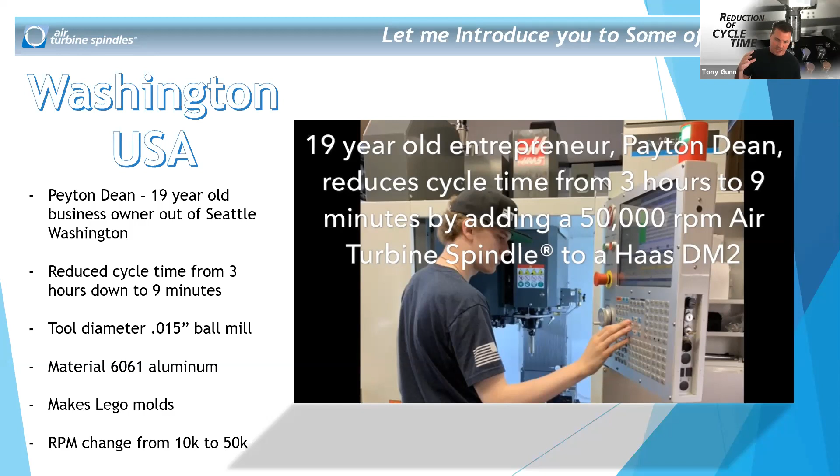But I was out there visiting him, and I noticed he was running a 15-thou diameter ball mill, and that ball mill was going about 3 inches a minute. What we were able to do, simply by changing a 10,000 RPM main spindle up to 50,000 RPM, was reduce that cycle time from 3 hours down to 9 minutes. On top of that, we were able to go from 3 inches a minute to 100 inches a minute just by increasing the RPM. So the reason I want to start with this is to show what success can happen by applying the right techniques to an existing operation. There wasn't anything crazy done. It was simply adding RPM to the existing program.

These guys here are my friends in India, based out of Pune. Their company is called Tork Motors, and they make a really cool electric motorcycle that goes for about 3,000 US dollars. We were able to reduce the cycle time on all of their components by 50% or more, from electrodes in copper to slotting in aluminum to engraving in steel. We reduced each one by 50, 60, 75% or more in cycle time. Again, all we did was change from 5,000, 8,000, 10,000 RPM up to 50,000 and 65,000 RPM.

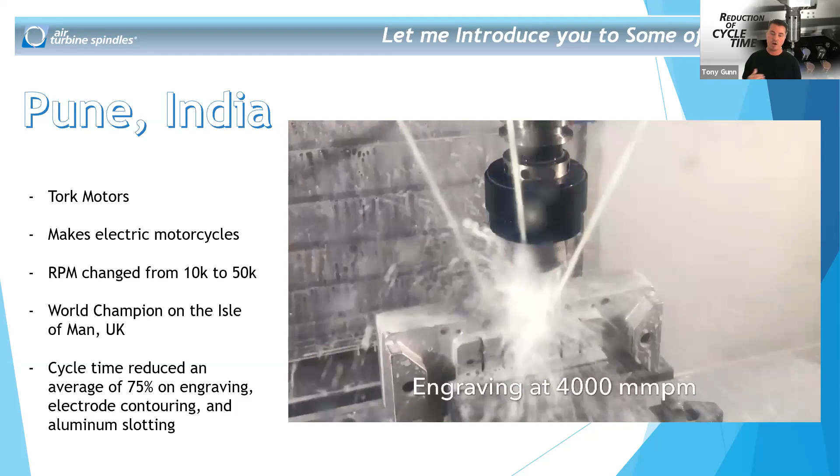So what is high-speed machining really?

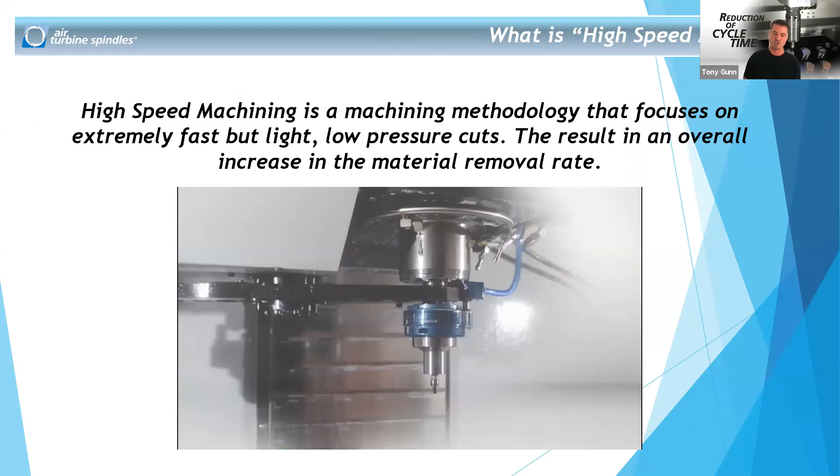This often gets complicated because people say, well, it's when I can move my machine really fast, which is true. And other people say it's when I can spin my tool at 100,000 RPM, which is also kind of true. But what we're trying to create is a perfect relationship between that feed rate, depth of cut, RPM, and rigidity of the work holding.

So what we're doing is taking light cuts and flying through it as quick as you can. Now a lot of people have a mindset that says, okay, right now with my 1/8 inch tool, I'm going an 1/8 inch deep. And if I change my RPM from 10,000 up to 50,000, I can keep my same depth of cut at 1/8 inch deep, but go 5 times faster in my feed rate based on going 5 times faster in RPM. And that's not actually how high-speed machining and micro machining work, based on tool rigidity as well.

That's why we want to define what high-speed machining is and the ability to do light, very fast passes to create that same material removal rate that we want to get.

So what are some of the challenges? Obviously this kid doesn't have much of a challenge doing that. I wish I could do that. But so what are some of the challenges?

I think a lot of these challenges are obvious in the sense that they're easy to find out. It's really easy to figure out when I'm making a mistake, because either I'm losing tool life that I shouldn't be losing, or my finish isn't what I want it to be, or I'm breaking my tools, or my cycle time just isn't as reduced as I thought it would be. So what are some of the challenges?

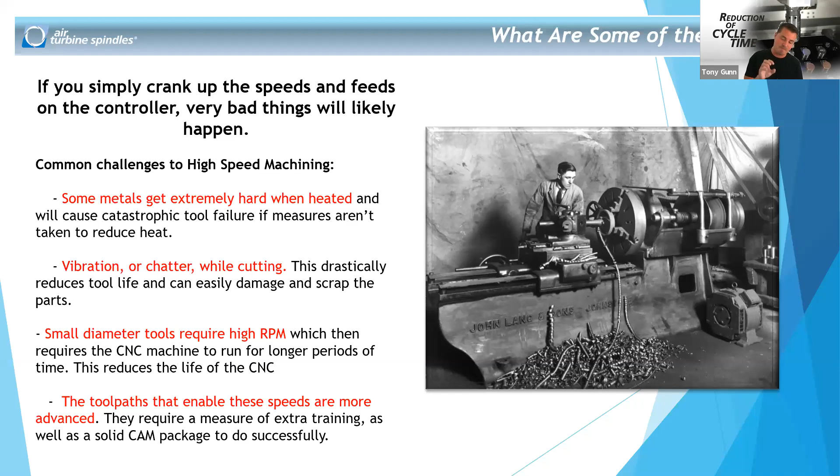Micro end mills live in a different world than most cutters are used to. My friend Don is going to go over a lot of this with Harvey Tool — he knows far more than I do. I think a lot of what happens is I know how to break them, and he knows how to tell me how not to break them.

But the feeds and speed formulas and calculations that work for larger cutters typically don't work the same way when you get into micro machining. Harvey Tool, to my knowledge, has a nice mathematical calculation that Don is going to share with you to get a good starting point for calculating depth of cut, feed rate, and the amount of rigidity a tool can have. But we suggest that the cutting physics start to set in with tool diameters at 1/8 inch and below.

And with small cutters, the cutting force is twice what conventional calculations suggest, which compounds the problem of rigidity and tool deflection based on how thin it is. So if it's gaining more force than a larger tool, and it creates more deflection and it's less rigid, that obviously makes these tools more delicate, in which case we must have higher RPM.

So rigidity, vibration, this is the #1 issue in high-speed machining, the #1 enemy. And it's not just how rigid my product is at AirTurbine or how rigid the product at Fifth Axis is with holding the material. It is from the machine spindle all the way down to the rigidity of the machine table. Any one of these pieces, from the machine spindle to the tool holder to the extensions to the workpiece to the machine table, if any one of those aren't as rigid as they should be, that'll be the weakest point, which would be the start of bringing down the ultimate success that you want to have while high-speed machining.

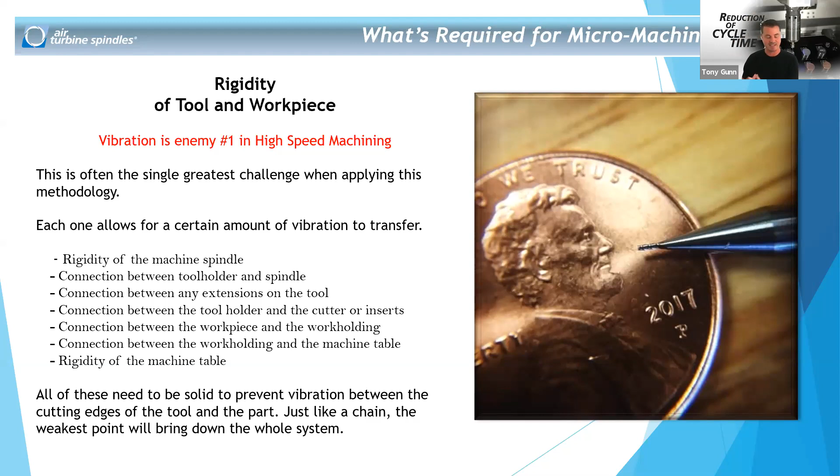And the smaller you get in tool diameter, the more rigid things need to become, the more important that runout is. But what happens when you don't have good runout? What happens when a tool is not perfect, or a spindle isn't spinning as symmetrical as you'd like? It causes one flute to cut deeper than another flute, which is going to create a weird chip load. It's maybe going to wear down your tool quicker than you want. Delicate cutters are also very stingy about how much chip load they can tolerate. So if one side of my end mill is cutting heavier than the other side, it is likely that I'm going to break that tool because I'm taking too heavy of a load on one side.

To keep runout from becoming a limiting factor, it needs to be kept no more than 10% of the chip load. In my opinion, that's a number that's thrown out there. It's a great number as a general rule, but we just need to be darn near perfect. When it comes to an air spindle spinning at, say, 50,000, 60,000, 90,000, 100,000 RPM, if you're not spinning almost or completely perfect, there will be an issue, which is why the air spindles, which we'll talk about later, are less than 2 micron in runout at 50,000 RPM.

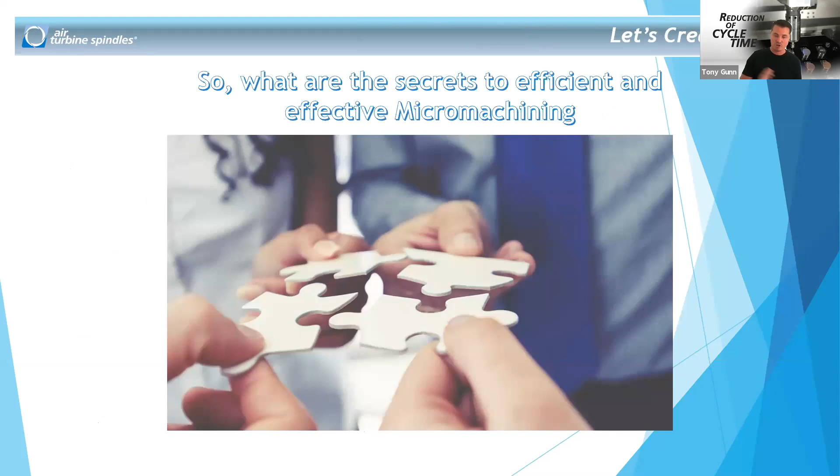So what are some secrets to efficient and effective micromachining? Now that we've figured out what some of the problems are, let's figure out how to solve them. My buddy Titan here, I'm not going to play this video because I don't think everyone can hear the volume on this Zoom platform. But the significance and importance of high RPM and SFM, so surface feet. What are we trying to generate by spinning faster? My buddy Titan is explaining that significance.

And I want you guys all to envision, and when I was doing this part live, I could see people shaking their heads. And right now I'm sitting in my living room kind of talking to myself. So I'm hoping everyone is going to understand what I'm saying.

But imagine back in the day, before all these rules were put in place, those merry-go-rounds that your parents or friends pushed you on, and there was no safety. The faster you were pushed, the greater that velocity became. If you're on the outside edge of that merry-go-round, it is tough to hang on. And that's kind of the fun, right? You're laughing, you might get flung off. The velocity on the outside is way more powerful than the velocity at the center. So if you're trying to hold on to the center of the merry-go-round, it's actually quite easy.

You can feel yourself being pulled to the outside of that merry-go-round where the velocity is more powerful. So what we're saying is, as you go to the inside of that force that's spinning, it must spin faster in order to generate the same velocity that's generated on the outside. So if I have a 5-inch face mill spinning at 10,000 RPM, and a 20 thou diameter ball mill spinning at 10,000 RPM, it's the same RPM, but your cutting velocity is going to be so much less for one versus the other, which is why that 20 thou diameter end mill needs to go 60 or 70,000 RPM versus that 5-inch face mill going at 10,000 RPM. And that's the significance.

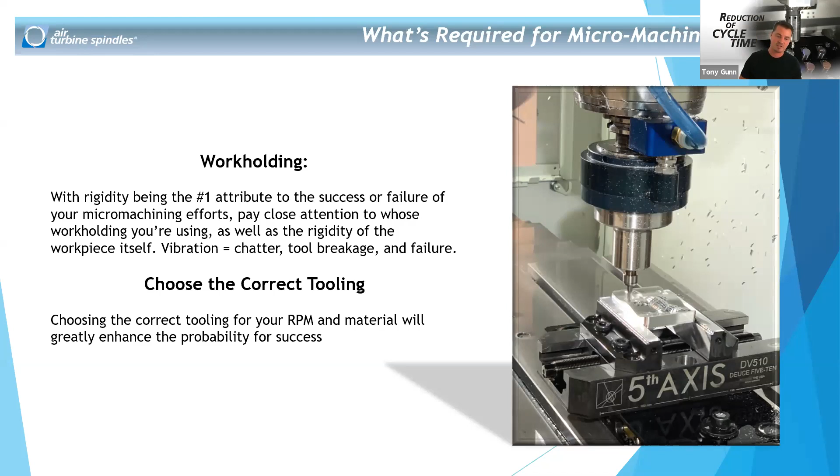Workholding, rigidity. We talked about this. I'm going to let Matt Evans, a lot of us call him Mevins, over at Fifth Axis, talk about this more with you. But workholding and that rigidity is super important. Choose the correct tooling, again, super important. That's what Harvey's here for. And high spindle RPM. We've talked a lot about this as well. So these are significant steps that need to be applied in order to generate micro machining success.

So what are the advantages of high speed?

And I've not seen this movie yet, but I heard both good and bad. So I think with everyone on quarantine, I'll give this a go before too long.

All right, so advantages of high-speed cutting.

Hopefully I'm not boring anyone yet. Hopefully my redundant voice is entertaining enough in my terrible jokes.

But now we get into the advantages of high-speed cutting.

Increased machining accuracy. And this is kind of a cool thing that I had researched a couple of years ago, and it's kind of neat. And I'm sure you guys are reading it as I talk. But what's neat is as the cutting speed increases, the cutting force decreases due to thixotropy, or the property of a material to be work softened due to the shear strain imparted on it by the tool's cutting edge, and then go back to its original hardness once the cutting process is complete.

That's pretty cool. Now, I'm not a metallurgist, but I do appreciate when a metallurgist does his job and applies that information to me, and then I can utilize it while spinning at a higher RPM to create success on my end.

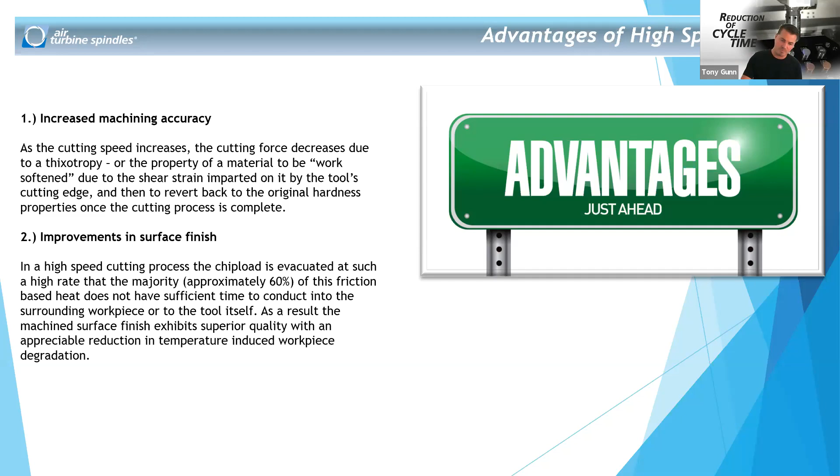Improvements in surface finish, I think that's pretty obvious based on what we were saying with velocity and the higher RPM that's required. When you get into that small diameter tooling, you want to get that mirror finish. You don't want to do any of those secondary operations. That high RPM is going to help immensely. Reduced burr formation, I believe that's also obvious based on a better finish. Longer tool life, which we've discussed a lot, and I believe Don's going to help us out with that.

Excuse me 1 second while I take a sip of tea.

And reduced cycle times. Reduced cycle times, I think, is obvious: if I'm going at 10,000 RPM and 5 inches a minute, and I go at 50,000 RPM and 100 inches a minute, that's obviously going to reduce my cycle time. So yes, RPM can help with that in conjunction with everyone else's technology. So how can the air spindles help you find success?

Work smarter, not harder. In an ever-evolving world, which is something we're all dealing with, adapting to, trying to adapt to at this very moment, with most of us working from home, some of the most intelligent things we can do have to do with being more clever in the way we think. Not just thinking outside the box, but realizing there is no box at all, and we have to recreate ideas of how we once thought. So thinking smarter and not harder includes everything, not just air spindles. It includes how we're going to all work together in this new modern world that we're living in.

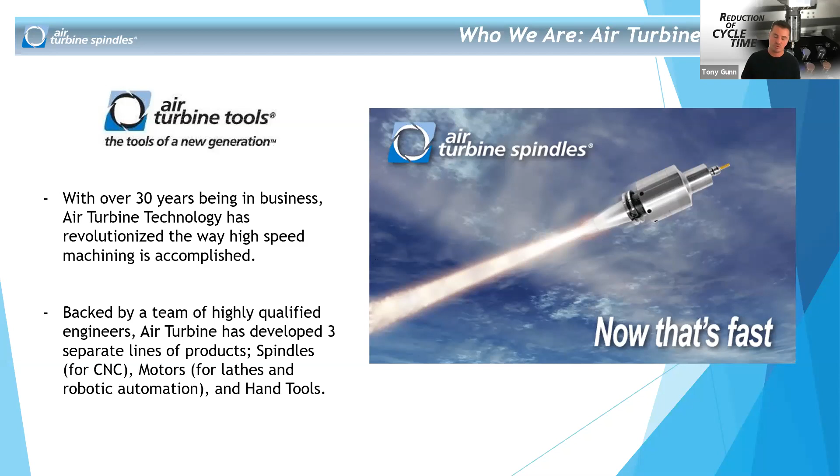AirTurbine's backed by a team of highly qualified engineers, and they've created 3 separate lines: one for your CNC mills, one for your turning machines, robotics, automation, and then your hand tools, which is how the company started over 30 years ago. So what benefits are received from this technology? Well, it says compatibility to machine with both speed and power without sacrificing one for the other. And what that means is what I just told you about the CNC machine being instantly turned into a high-speed machining center.

If I have all the horsepower and torque that I need in that main machine spindle, but I'm maxed out at 12,000 RPM, and I have a small diameter tool or 2 small diameter tools, and I have to max out my machine RPM at 12,000 for 30 minutes, an hour, 3 hours, 4 hours, that's not a healthy relationship for your machine. So by applying an air spindle or a higher RPM situation of any kind to your CNC machine, you now don't have to sacrifice speed and power.

You can have the speed when it's required by rotating the air spindle in through your carousel, which we'll go over later, in through your ATC into your main spindle. So use all your horsepower and torque as you normally would on your CNC machine, but then rotate in the higher RPM whenever it's required.

This way you don't have to dedicate a whole machine just to higher RPM, and you have to have a secondary operation doing this. This way you don't have to machine for hours and hours, redlining the RPM of your CNC machine. It's a combination of both. It's cost effective. We can go over prices later on if you want to, but again, this is not for me to try and sell products today. I just want to try and educate.

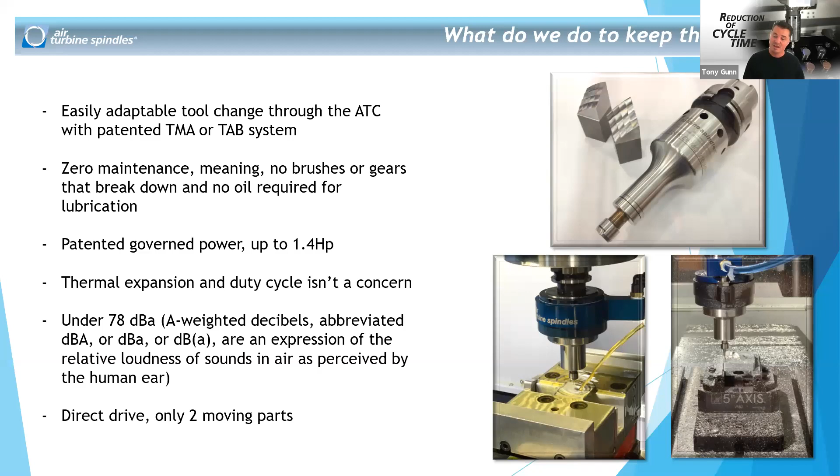Thermal expansion, we've talked about that, and it's super quiet. It is under 78 dBA. A lot of times in these machine shops, you can't even tell they're running. It's not the first time for me to plug it into a machine and somebody looks at me and goes, 'Did you turn it on yet?' And they actually want to touch the spinning cutting tool at 50,000 RPM to make sure it's spinning, which is a liability. Don't do that. But they're incredibly quiet, and that's going to be a benefit as well.

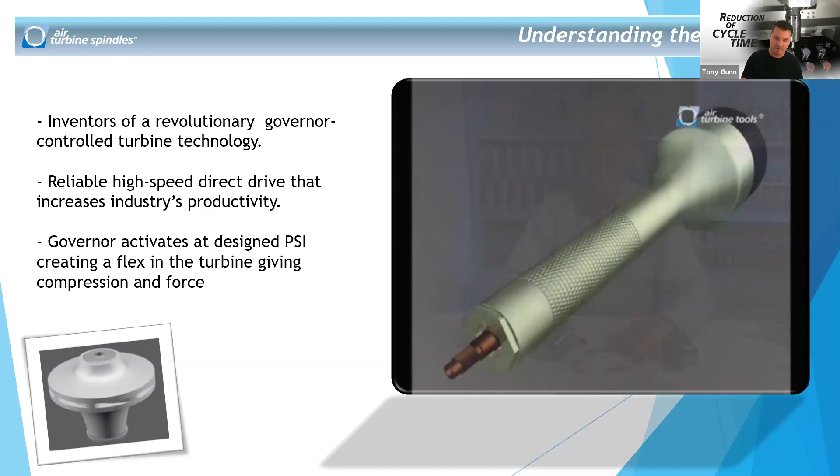This was a Kennametal ceramic tool cutting Inconel, and this is the max capacity of the shank diameter that an air spindle can hold. At 160 thousandths deep, 40,000 RPM, and a feed rate of 190 inches per minute, we were able to quadruple the tool life of that ceramic tool cutting Inconel. Inconel, with its high nickel content, is incredibly hard, so most high-speed alternatives don't have the capability to really put a dent into these harder materials. This just shows you that the AirTurbine product can.

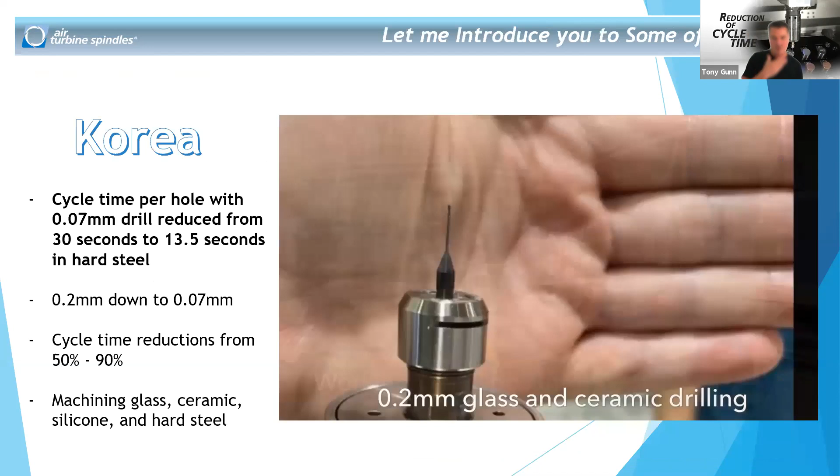So friends in Korea, again, these guys are precise. I love them. So when you get all of these attributes together, your rigidity, your tooling, your programming, your RPM, what can be accomplished?

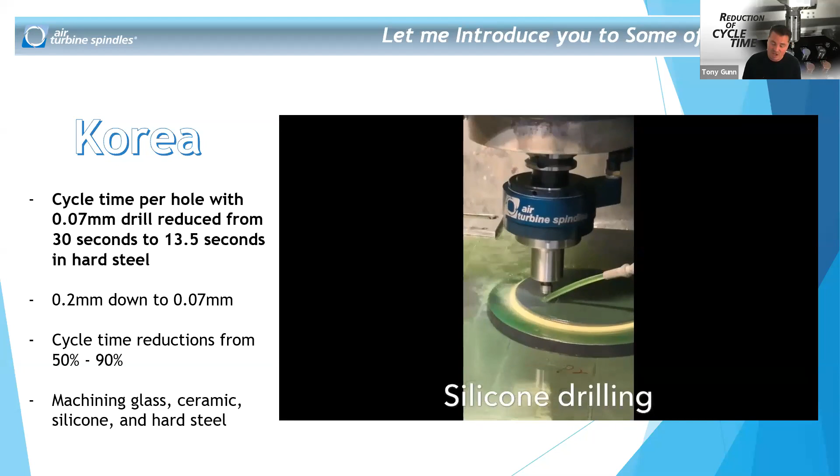So here in Korea, we were machining hard steel with a 0.07 millimeter tool diameter, which I believe translates to about 2/1000. We were able to reduce the cycle time per hole from 30 seconds to 13.5 seconds per hole. This customer had thousands of holes, and I was told that the overall cycle time for one of his jobs was 32 days, which with this new hole-per-second cycle time, took his 32-day cycle time down to about 15 days just by adding RPM, making sure the tool was as rigid as could be, and the run out was good.

But this is some of the success that can be created with higher RPM. 2/1000 in diameter is not going to be possible without really tiptoeing through a program.

So we talked a little bit about thermal expansion, right? With longer programs, whether it be a machine spindle or anything with gears, the components on the inside will heat up and expand, and too much heat will actually break them down, which is why in a lot of situations you have to have breaks from your CNC running at higher RPM because it needs to cool off. It's going to break down and expose the weaknesses of the machine itself.

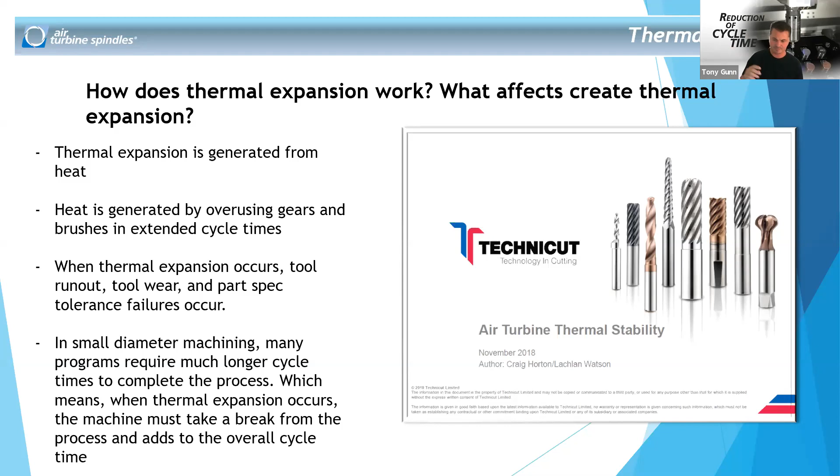So with AirTurbine, being that it's so significantly simple on the inside, you don't have to worry about that thermal expansion. A test was done by our friends in the UK called Technicut, an amazing company that makes their own tools for the aerospace world. Technicut decided that they wanted to run a test with our products and with AirTurbine's products.

What they found was that after an initial heat up, it remained the same temperature for over 12 hours. What else was found, you guys can read this, says the maximum change of thermal expansion was 9 micron, which was taken after 10 hours. However, the small increase towards the end is due to the buildup of cutting edge, which was observed at the end of the test. I was on the phone with these guys, a great group of people, and the titanium they were cutting actually started to stick to the end mill itself. Due to that, 8 micron came from the overall 9, and only 1 true micron of thermal expansion after 10 to 12 hours of straight running.

So tool mounting, tool changer mounting assembly, that's what we call a TMA. A lot of people call it a stop block. As you can see here, it's about to tool change out.

One of the most popular questions we get is, do I have to manually load it and unload it? Can I put it through my ATC unit like everything else? You absolutely can. It's part of keeping it simple, and part of making sure we're not adding any cycle time to your already reduced cycle times that you're trying to have. So absolutely, this goes through the ATC of any of your CNCs, and that way you can use your main spindle as it should be used, for power, torque, and horsepower. And then when you need the higher RPM, you just rotate it in quite simply.

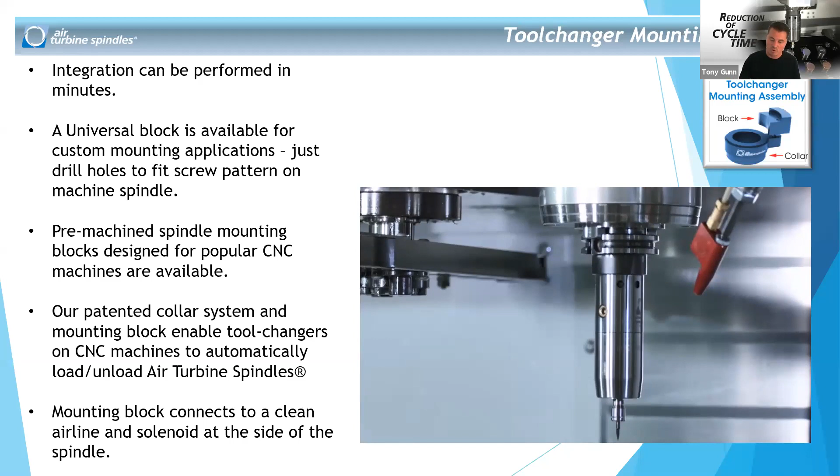But there are a few different ways to power the air spindles. You can power them by utilizing through-spindle air, which is air through the back end of the tool, super simple. You can use a manual connect and disconnect through the side, which is a little bit slower and goes back to having to manually load and unload, or our patented TMA block, which we just discussed, which allows you to then go through the TMA like any other tool.

So as far as technology, what is AirTurbine continuing to do to make your life easier? Well, new product is a 90-degree spindle. A lot of people get excited about this. It's what's great about a Haas machine, and many of the other machines, of course, but as you can see, this is tested on a Haas machine. If I do an M19P and then pick a number, I can rotate that 90-degree tool anywhere in the 360-degree area. And then it goes right back into the tool changer.

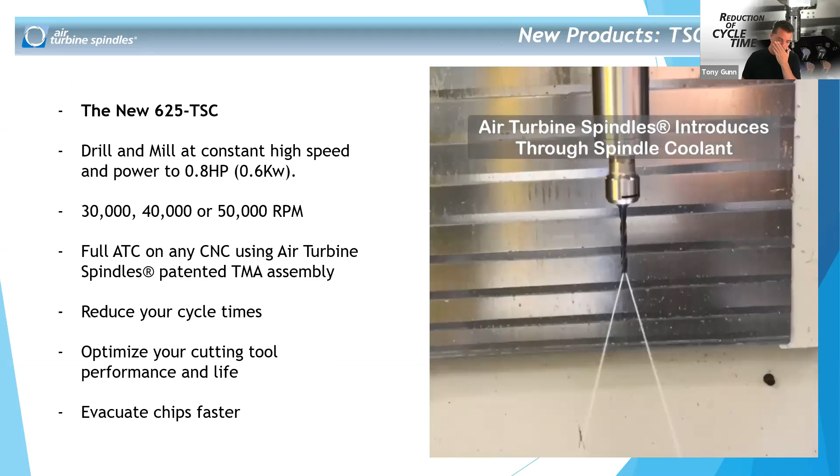Recently released is through spindle coolant. So if you're doing a lot of drilling, if you're having trouble evacuating chips, the same powerful air that goes through the side of this tool is still constantly applied, but now we have a hollow shaft that allows the coolant to go through the back end. This allows you to drill a lot faster, have the longer tool life you're looking for, remove chips, and reduce cycle times. That's the benefit of a through spindle coolant tool.

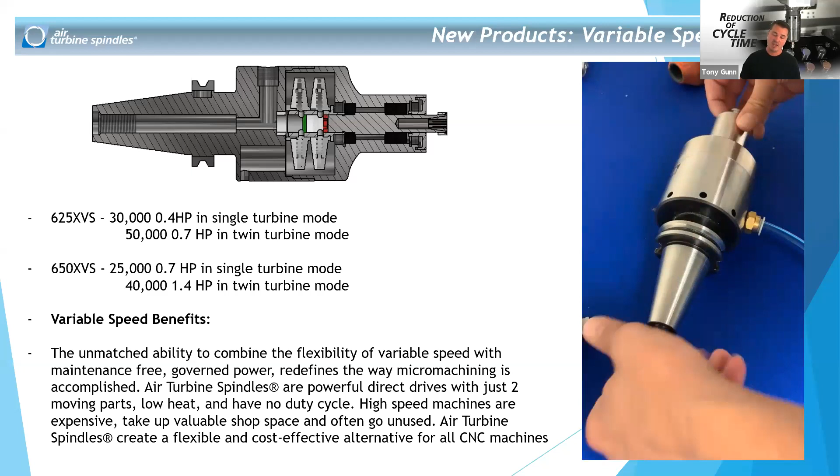Something else that's exciting for us is variable speed. For over 30 years, AirTurbine has been known for one powerful fixed speed that doesn't reduce while under load. However, recently released at EMO this past year, 2019, is a variable speed tool. There's a lock nut that slides all the way forward and all the way backward. When it slides forward, you're using one turbine spinning at either 30,000 or 25,000 RPM, depending on the tool. As you back that nut out, you activate a second turbine, allowing a second speed of 50,000 or 40,000 RPM, depending on the tool. Now you have the option of a variable speed tool.

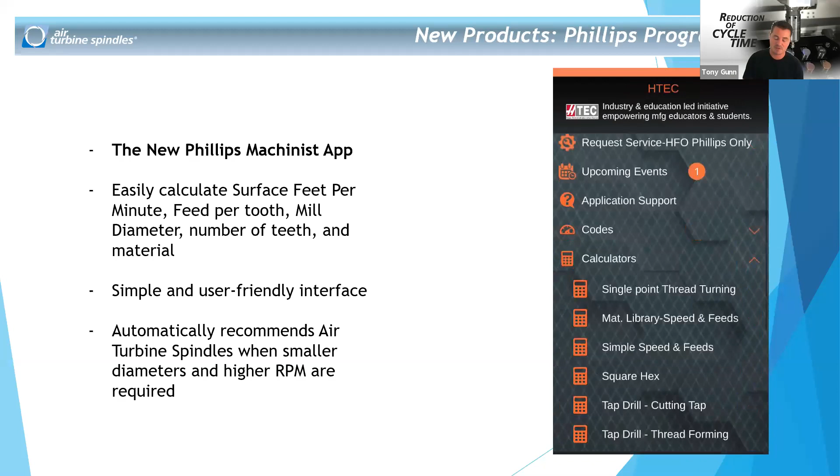Working with the Phillips team over at Haas, also a great group of guys, they developed the Phillips Machinist app. If you don't have an app to help with your programming calculations, we highly recommend this one. It's a great one. What's beneficial to AirTurbine is if you're putting in numbers that require a higher RPM or a faster machining speed, it will automatically take you to the AirTurbine website, where you can pick what's required for your tool, your end mill diameter, and your material. You'll be directed to the exact area you need. The Phillips Machinist app has been a huge benefit to a lot of customers. If you haven't downloaded it, I'd recommend it for many reasons.

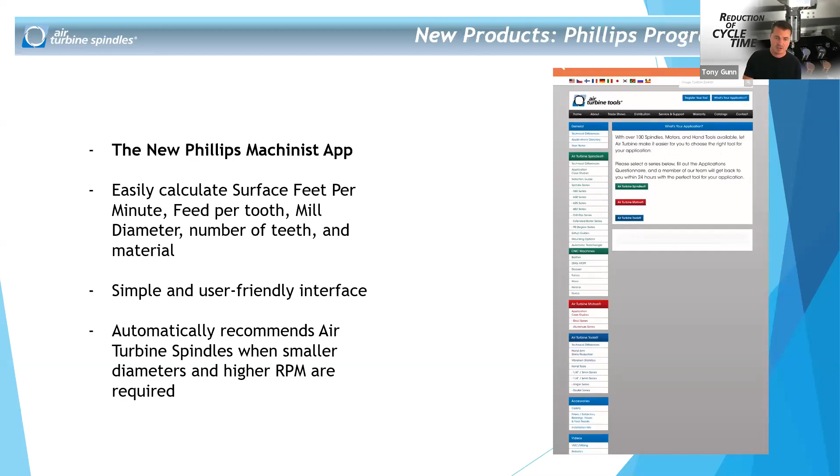I'm going to quickly go over this, because I have no idea what time it is, and I know I talked a lot. We're a little bit over, Tony, just a heads up. Awesome, you're all right, Rob. I'll speak like I'm selling cars or something. This is significant because most people don't realize how quickly you can make money, and I'm going to talk quickly—if I repeat myself, that just means I'm talking slower. Let me go ahead and skip ahead.

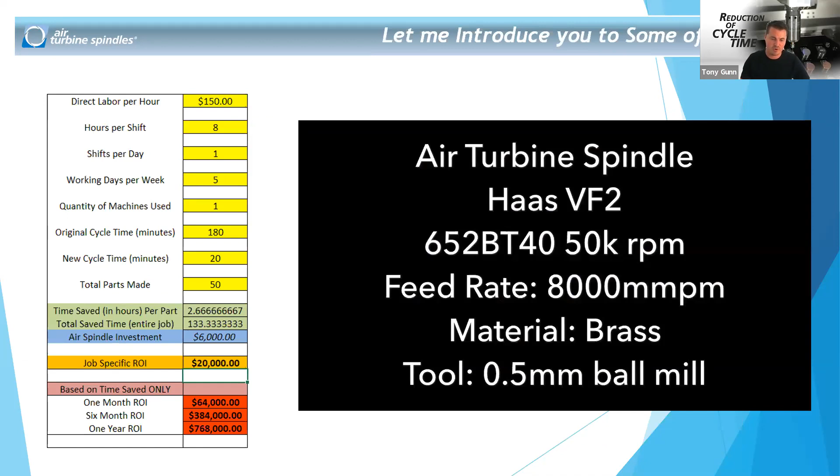Although I'm showing another $20,000 in savings here on a soap mold, I don't want to be too redundant. Thanks to Rob, I now know what time it is, so we're going to skip through this one, but you can see the cycle time was saved again.

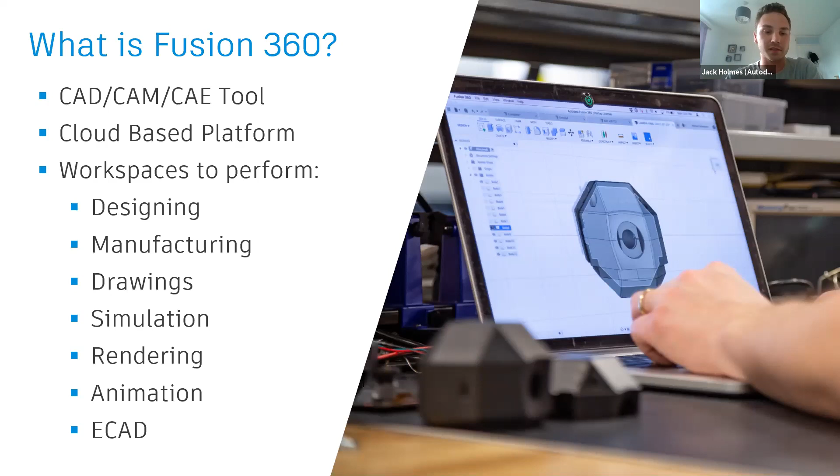So we've got workspaces for doing design work, for doing manufacturing, for doing 2D drawings, simulations, rendering, animations, and the latest addition, which was put in a couple months ago, was an ECAD workspace as well. So that's an area for doing electronics work, so for designing and creating PCBs and all that kind of stuff. So we'll have a closer look at some of those workspaces now.

So the first one we're going to have a look at is solid modeling. So within the design area, we can create 2D sketches and then use tools such as extrude and revolve to take those 2D sketches and turn them into 3D solid models. And then on those 3D models, we can apply various features such as fillets and chamfers. We can put draft angled faces on there. We can add extra material, remove material, etc. All of the standard CAD tools that we'd expect, really.

When we set these up, we obviously dimension the various features and items, and we can link these dimensions together as well. So that means, for example, if we make the diameter of circle 1 relative to the diameter of circle 2, when we change the size of that first circle, the second one will automatically update. And if we're clever about it, we can set up the whole model so that everything's linked together. So just by changing one dimension, everything will scale and adjust accordingly.

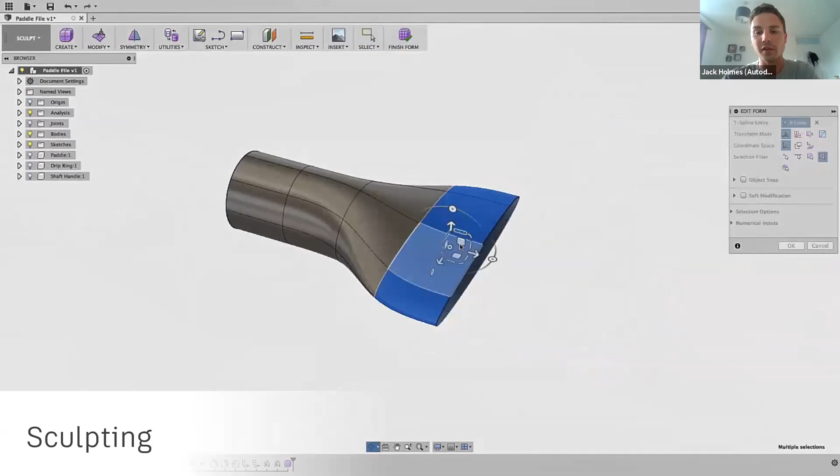As well as solid modeling, we can also do what's called sculpting in the design space as well. So rather than being based off dimensioned 2D sketches, it's a much more free-form style of designing and working.

So you'll see here it's based off manipulating surfaces, manipulating the vertices and the nodes of these surfaces by dragging them around, rotating them, scaling them in a much more organic freeform way, I guess. You can imagine it similar to sculpting clay or something like that. It's much more visual based than entering specific dimensions or anything.

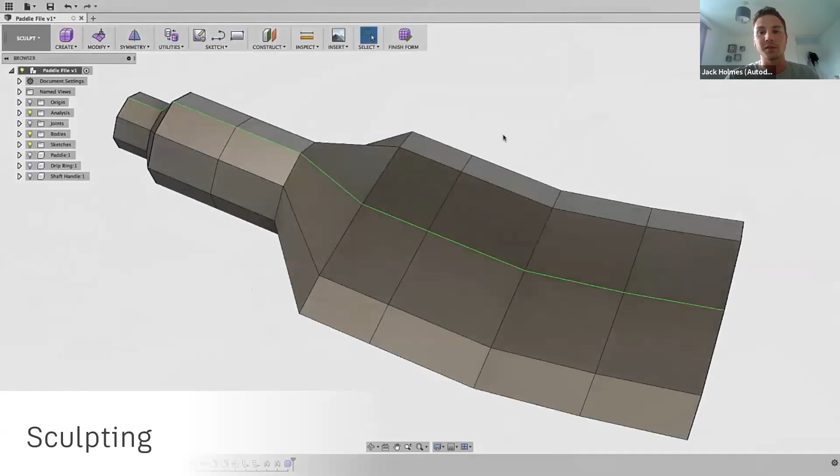The models that we get out of here, once you're done with your sculpting work, can be used in exactly the same way as the solid models, so we can still apply fillets, chamfers, etc. And we can switch between the two just by changing literally the tab that you're in on the design workspace.

So on top of these two, we've also got sheet metal design. So this is, as the name suggests, a way of designing our sheet metal parts. So we can create our 2D layout for these. We can put in where the folds and bends are. We can put in the cutouts, and then fold those into the finished form.

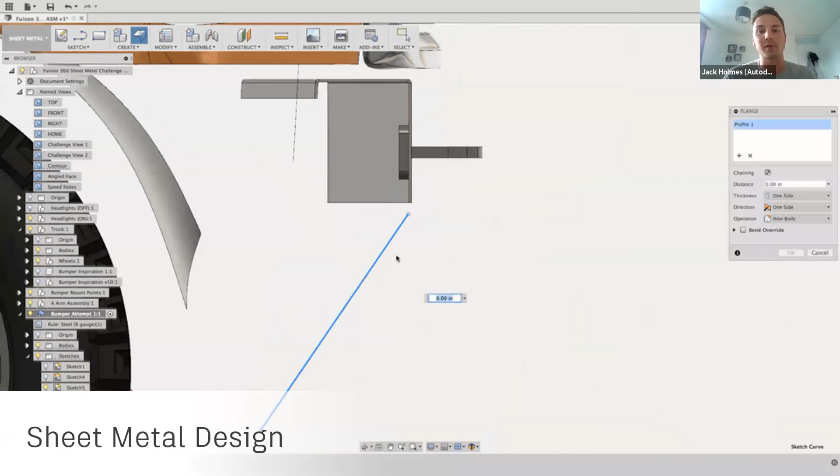And we can do this all as part of the rest of the model and the assembly as well. So we can do it in place, around our solid models, around our sculpted models, to make sure that everything fits together as it should. And that's one of the big benefits of having this integrated system, is that we can swap back and forth between these different environments to make sure everything is linked and lined up as it needs to be.

So as well as our design space, we've also got the manufacturing workspace, and I'm guessing that's what most people on this call are most interested in. So we can take our models, whether they're our solid models, our sculpted models, our sheet metal, and bring those over to the manufacturing workspace. And again, we do that pretty much with just the flick of a switch. We just choose our workspace from the drop-down list, and it will bring us into this manufacturing workspace instead.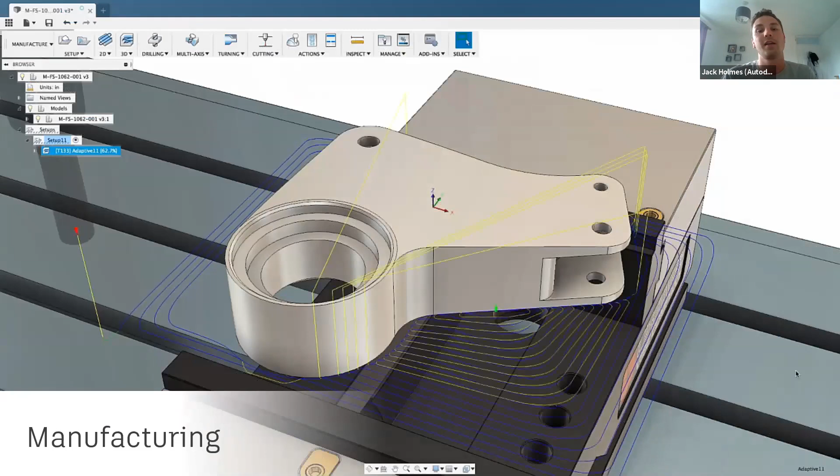And in here, we can carry out milling operations, turning. We can do cutting, so that's things like laser cutting, water jet, plasma cutting to do our sheet metal parts, for example. And we can also do additive work as well, so 3D printing. For the milling work, we can do everything up to full 5-axis simultaneous. And for the turning, we can do a combination of the milling strategies as well, to do turn-mill rather than just your standard operation.

Within here, you've basically got a number of different strategies depending on the operation type we're going for, whether it is milling, turning, etc. And then as we can see, you apply your toolpaths to your model. You can simulate these toolpaths and then run this on your machine in the real world.

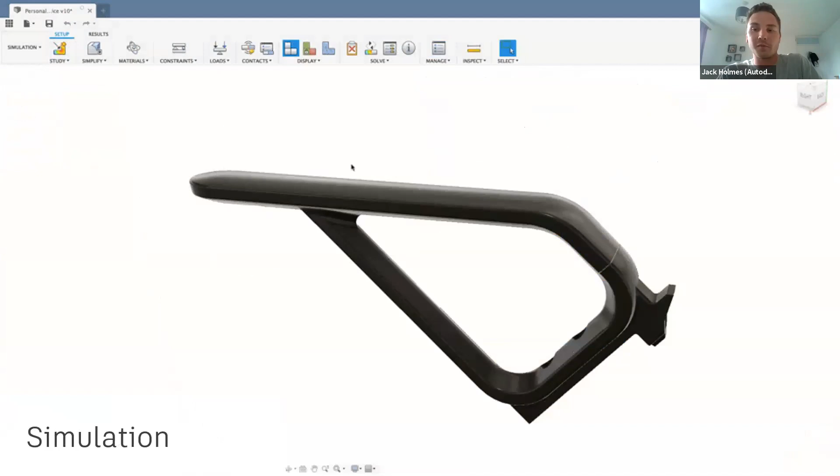On top of all of this, we've also got simulation. The simulation will allow you to simulate stresses and loads. We can simulate thermal stresses. We can simulate modal frequencies. You can see in that pop-up there all of the different types of simulations that we can run. So you can take your part that you've created in the design workspace and simulate this in the environment that it's going to be applied in.

This then gives us, you see, the color map that shows you stresses, deflections, even the factor of safety and criteria like this, to make sure that it's going to hold up to how it needs to act.

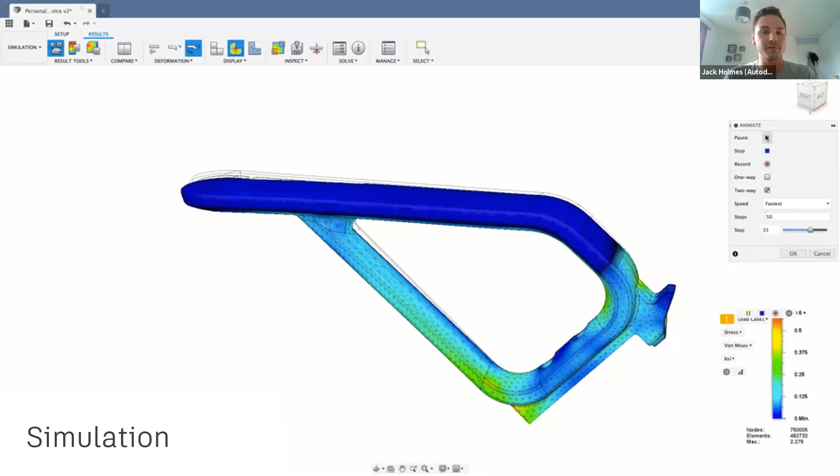And the fact that this is all tied together means that if you do need to go back to the design of the part, it's very easy to, again, flick of a switch, jump back to the design space, make some modifications, so maybe add a bit more material on to stiffen it up. Maybe it's been over-engineered, so we can cut a bit of material away. Back into the simulation, run it through again, make sure it all looks good, and go through that iterative process very easily as need be.

There's also an animation workspace. So we can see here, you can take an assembly of parts that have relative motion to each other, and we can animate this. You could also take a stationary assembly and do, for example, an exploded view of how all of these parts come together and assemble.

So this area is really useful for creating a visualization of your parts before you actually go and manufacture them, to just express how they're going to look, to check for maybe collisions or clearance issues, as well as design for assembly issues as well. You can make sure that everything is going to fit together in the order you expect it to. And you can check it all here in the software again before actually going and making these parts and realizing there's an issue after you've spent hours producing them all.

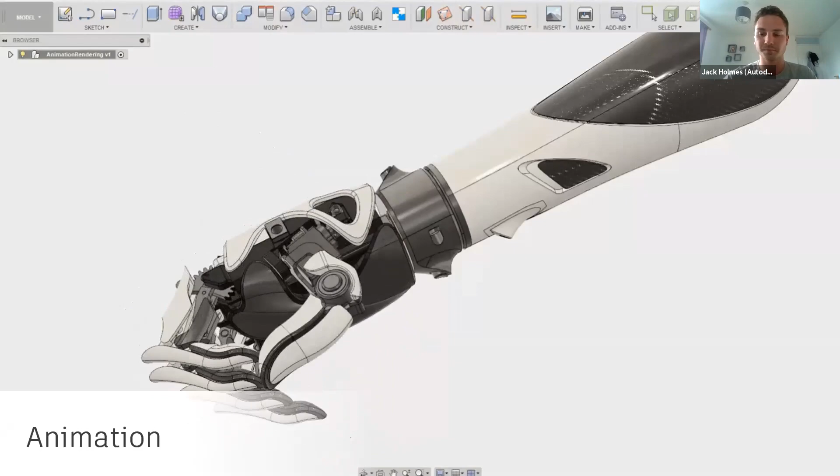There's also the rendering workspace. So what this allows you to do is apply materials to your part. You can set up lighting effects and backgrounds and set up the shadow effects and things like this. And it will then allow you to create these photorealistic images of your parts, of your assemblies. Again, a nice way to represent what things are going to look like inside of the software before going and manufacturing them. And it's a nice way to get the point across before those parts are produced.

The last thing that I'm just going to talk about briefly is the drawing space as well. So we've got all of these design tools and design areas. You can then take these modeled parts and bring them into the drawing space here, where we can then go ahead and create some 2D drawings of these. So you can drop your parts onto the page templates, as we can see an example one here, and basically create yourself very easily some engineering drawings of these parts.

And these are really easy to make. You basically just drop the views in. We have one, what's called the parent view, and then we can do projected views off of that. So wherever you move your mouse to, it will automatically do the correct isometric view for you, and we just click again to drop it in, and all of that's taken care of for you.

We can also add dimensions onto here, and those dimensions are linked back to the solid model itself. So if you were to go and change the size of a hole, for example, that you've dimensioned, you'd see that dimension change in the drawing here. And again, a big benefit of having all of this integrated together and all linked together is that if you change the data in one of these workspaces, all of the relevant data is updated in the other workspaces as well.

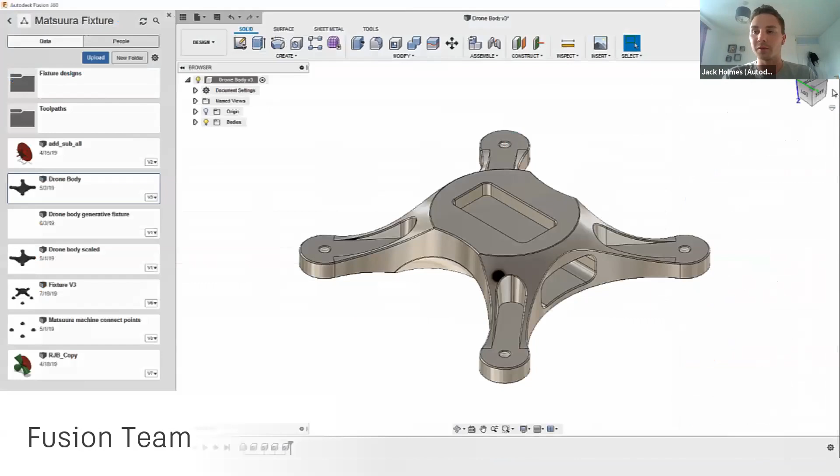Fusion 360 is really the kind of convergence of design and manufacturing capabilities. It puts the data at the center, which just means that everybody involved in that design and manufacturing process can get access to that data at every stage of that process as well.

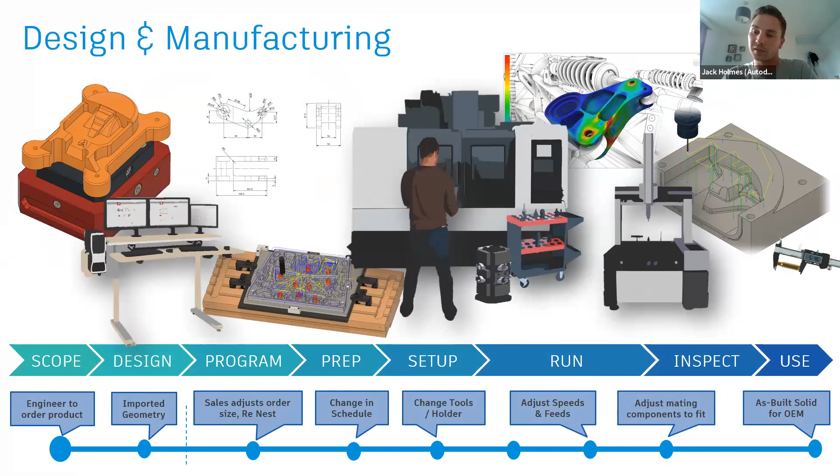And Fusion 360 can be used at every stage of the design and manufacturing process. So from scoping out the job to obviously doing the actual design work, programming the part in the manufacturing space, through to then running it on the machine, even doing the inspection on the part after it's been created. So within the manufacturing workspace, there is also some probing capabilities, making sure that that part gets all the way through to actual use.

Okay, so hopefully everybody is a bit more clear of what Fusion 360 is. As you can see, it does a lot, so we don't really have time to do a deep dive of every single workspace, but there's just a bit of a whistle-stop tour of its capabilities there. So we'll have a look now at the general Fusion 360 CAD/CAM workflow that you'd usually go through, so we can then understand how high-speed machining would fit into this.

So the first stage is to either create your CAD model, but obviously you're not always creating your own model that's going to go and be machined. Sometimes this is given to you, or it's just an old model that was made a while ago. So it's also worth noting that Fusion 360 will also import all standard CAD formats really. So whether that be IGES, STEP, Parasolid, etc., you'll be able to import them all in if you're not creating the model yourself within Fusion.

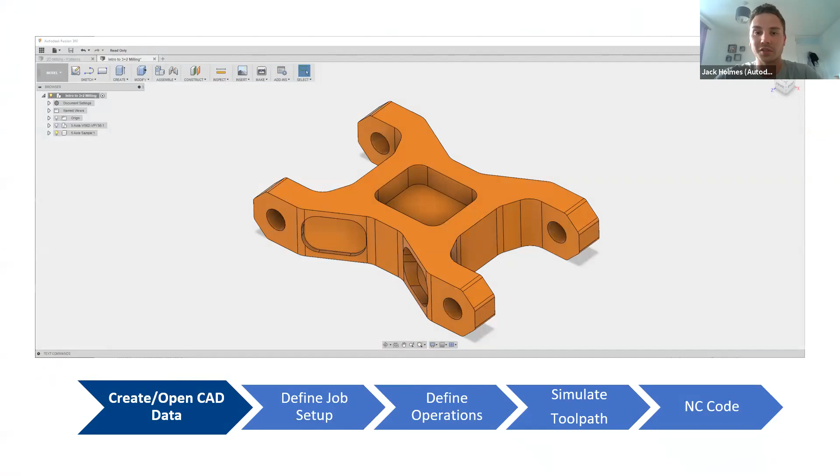The next stage is then to define our job setup. So this is where we define the stock material. You position your coordinate system to link this up with where you create this on your machine tool, and also where we define the operation type as well. So this is where we set if we're going to be doing milling work, turning work, cutting, etc.

We can then go ahead and define the operations. So there's a number of different strategies for toolpaths, depending on whether we're doing milling, turning, and then within there are different strategies for if we're doing roughing toolpaths, whether we're doing finishing on surfaces. There's also some different cycles available for drilling and some more specific toolpaths for things like chamfering.

So obviously which one we choose and which one we define depends on what it is we're trying to cut, the part itself, and then the features on that part, as well as the actual stage of the machining we're at. So obviously when we're roughing, we'll use different toolpaths to when we're doing the finishing work.

After we've created our toolpaths, we want to go ahead and simulate those. So we can simulate with the stock, so we can ensure that we're cutting away enough stock in the correct places. We can check for any collisions or gouges that might be occurring so that we can fix them at this stage in the simulation rather than discovering the issue on the machine tool itself, which is obviously going to cause problems later down the line.

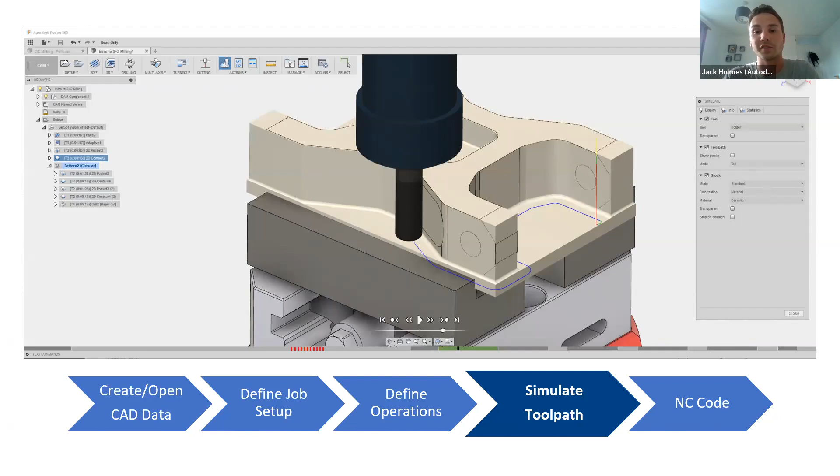Once we're happy that everything looks good and we've got all of our toolpaths in there and the simulation is showing no errors, then it's time to obviously create our program.

For this, we obviously need a post-processor file to make sure that this is going to work on our relevant machine tool. All of the post processors are available for free with Fusion 360. There's a whole library of these online, and this link here will take you to that library from within Fusion. It can also be found with a simple Google, and there's also about 100 posts installed with Fusion as well. So it makes it very accessible to take your programs from Fusion onto your machine.

Okay, so now we understand a little bit about the Fusion 360 CAD/CAM workflow, we can look at how high-speed machining is actually going to fit into this process. Obviously, because it's to do with machining, it's going to fit into that stage of the process. We can't really change anything in the design - it's things that we're going to do on an operation level where we're going to use this high-speed machining.

So the first way that we can do this is in our roughing stage, and this is by using something called adaptive clearing. Adaptive clearing is a method of essentially clearing material as quickly as we can, which is exactly what we're trying to do - not only in the roughing stage, but throughout the entire machining process. It works by keeping a constant load on the tool at all times, so the toolpath will flow around your part to ensure that this constant load is on the tool rather than a varying load throughout the cutting process.

The best way to use adaptive clearing is to use the full length of the tool, so to cut with all of the flute that you have basically, and do this with a small step over. So we're taking small cuts in width, but full depth cuts. This will clear material quicker, which will obviously then lead to a decreased cycle time. As well as decreasing the cycle time, we're also going to increase our tool life as well, because this method is actually kinder on the tools, because we're keeping this constant load and spreading out this load over the tool, rather than more traditional cutting methods of using the full diameter of the tool but with quite a shallow cut.

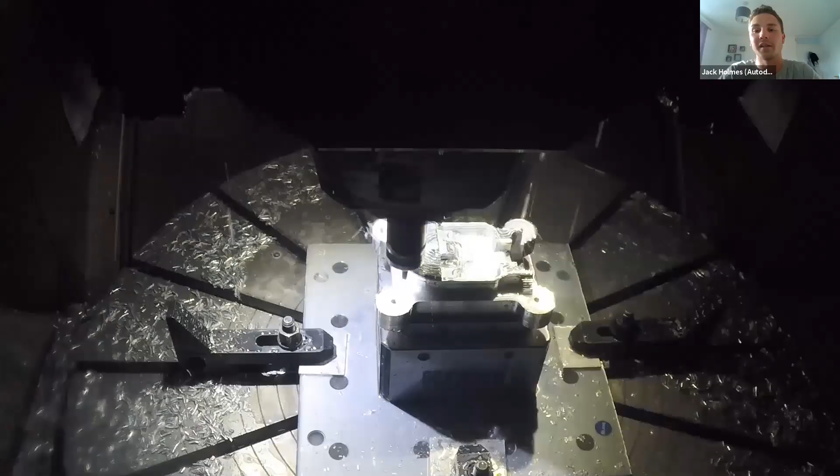So there's just a very quick video of the adaptive clearing actually in action on the machine. We can see on this part, small step over, fairly deep step down there. Actually, in this case, we're not using the full length of the tool - obviously, sometimes this will depend on the geometry that you're trying to cut. So if we're not actually cutting down far enough to use the full tool length, then that's not going to be available, but where we can, as much of the tool as we can use as possible is what we're trying to do.

Adaptive clearing is a very effective method for our roughing stages. But we also want to be able to speed up our finishing stages as well. Just like with roughing, what we're trying to do here is clear material quicker. That's the whole aim of high-speed machining, essentially, is just to cut through this material as quick as we can. Unlike with roughing, there isn't one specific strategy we can do this with, because finishing work is very dependent on the features we're trying to finish, the particular surface we're finishing, and the areas we're trying to cut.

Hey, Jack, just really quickly jumping in - conscious of time, we need to continue to move along a little bit. Just a heads up.

Cool, no worries. I'll whiz through.

So if we can't change the actual operations, what can we do? This is where our air turbine spindles come into place. Tony's already spoken about these, so I won't spend particularly long, especially as we're running out of time. This is where we can use our air spindles to increase our spindle speed, therefore increasing our feed rate, therefore bringing our overall cycle time down.

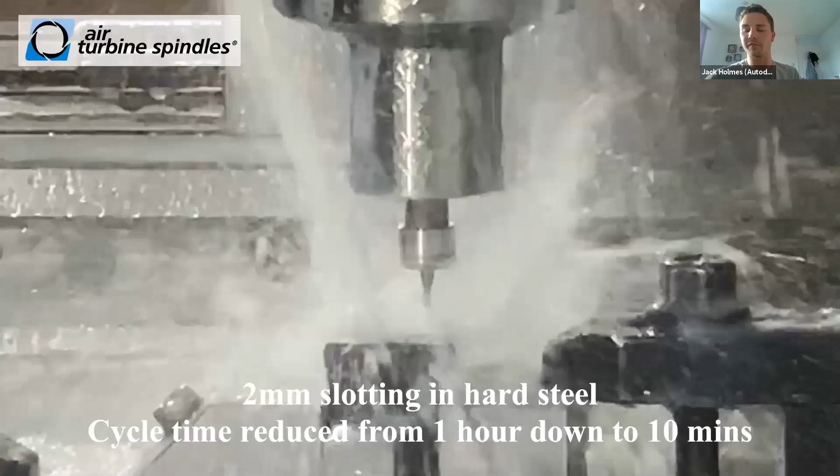Quick video here - you've kind of seen this in action, so I won't linger, but we can see a couple examples of taking that one down from 30 minutes to 5 minutes, 1 hour down to 10 minutes, and so on. If you want to see any more of that, there's plenty of videos I'm sure Tony can send you.

All right, so we'll just have a quick look now to finish up at how we can use Fusion 360 and air turbine spindles together to get the most out of both of them. Luckily for you, we've made it very easy to do this, and I'll just run through that workflow now.

The first thing you're going to want to do if using Fusion 360 and air turbine spindles is to import the air turbine spindle tool library into your Fusion 360 tool library. This will basically bring in the air turbines as holder models, which will then allow you to assign these to the tools that you're going to cut with. These will have some information associated to them so that Fusion will pick up that you're using this and basically output the relevant code.

So that's nice and easy to do - you just need to right click on your local library, hit import and find that relevant file. At the minute, we're just giving these files to people as requested, so if you do want to do this, let one of us know and we can pass that on to you. Once it's in there, it'll be in your local library in Fusion for good, so you'll have that available to use with all your projects going forward.

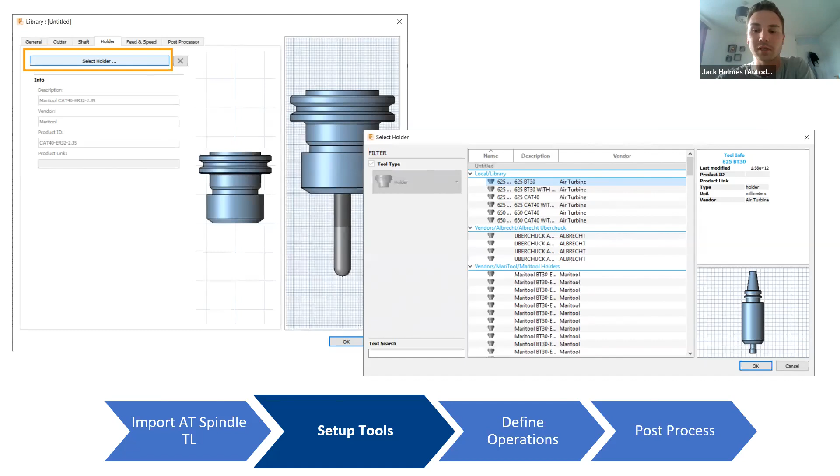Once it's in your library, you're then ready to set up your tools. This will be done same as normal, so we can define tool length, tool radius, all of that kind of stuff. We just want to make sure that we're selecting the holder and using one of your air turbine spindle holders, the relevant one you're going to use, linking that up with your tool to make sure that's going to be used both to give you the correct code and also just for the simulation collision purposes, to be as accurate as possible.

Also, when we're setting up our tools, we want to define our speeds and feeds. The reason we're using the air turbine spindles is basically to give us higher spindle speed, therefore higher cutting feed. So the best way to calculate this, if you don't have the info already, is to make a note of your feed per tooth value, because this is what we're trying to keep the same here. It's all well and good upping the feed rate, but if we go in too quick, we could damage the tool, damage the part, get a poor surface finish, and all this kind of stuff.

So if you make a note of your feed per tooth value, as it is with your standard spindle, and then input your new spindle speed - in this case, we've gone with 50,000 RPM - you'll see your feed per tooth value automatically change in the library. If you then go in and manually change that back, you'll see the cutting feed rate update instead. In this case, the feed rate has gone up to 10.5 meters a minute, which was considerably higher than we were using before, which in turn is going to give us the ability to bring down our cycle time.

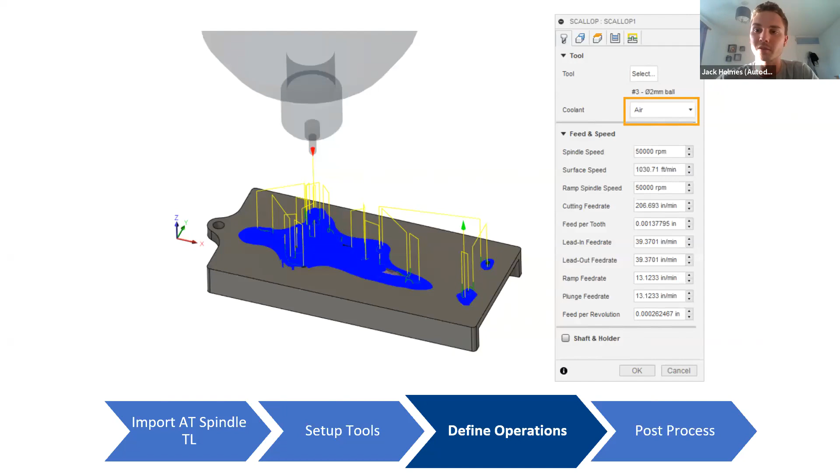Once we've got all of our operations in place, we're ready to post-process and get our NC code out. For this, you'll want one of the modified posts we've got to output the correct code when using these AirTurbine spindles. Just like the tool library, we're handing these out as they're asked for, so if you want this post with the modified ability to use the AirTurbine spindles, let us know. At the minute we've got posts for Haas machines and the Fanuc Robo Drill. If there are any other specific machines, let us know and we can look into creating a modified version for that as well.

Cool. Awesome. Well, thank you all for being here. I appreciate everyone taking the time. Again, this is kind of new for all of us, but pretty cool that we can get us all together. My name's Matt. I work for Fifth Axis. We're based here in San Diego, California, very close with Autodesk, AirTurbine, Harvey. So thank you guys for giving me the opportunity to speak on a couple subjects today.

Let me quickly jump into a little bit of who we are, mainly because the name Fifth Axis makes everybody think immediately of multi-axis machining, which was true. When we started the job shop, we were strictly a multi-axis job shop. But as we've grown, we've got, you name it, 55 3-axis machines, a bunch of horizontal machines. So the company is all-encompassing: 3, 4, and 5-axis. The product line, the vices, the fixtures, everything that we do that I'm going to discuss in a little bit is really geared towards 3, 4, and 5-axis.

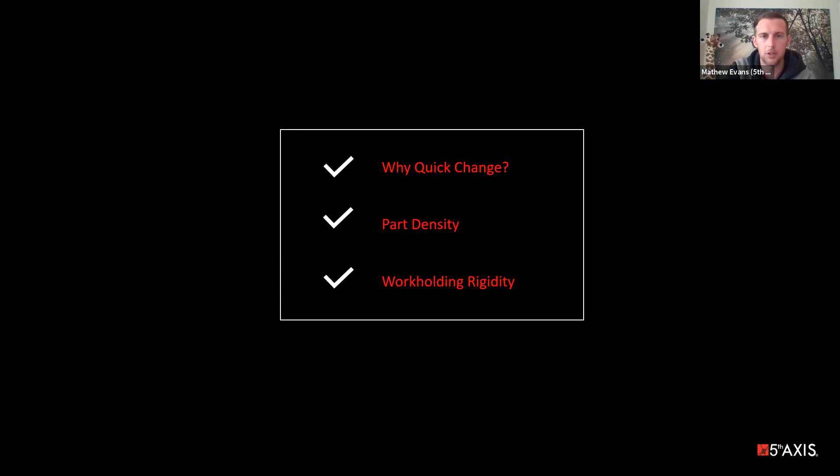So let me jump right into it. So right off the bat, the first thing I wanted to touch on was quick change, right?

Setup times and changeover times, we look at. So when Tony was talking about drilling holes and saving time there, we look at that, we look at our tooling, but we also look at how long does it realistically take to set up a machine? How long does it realistically take to change over a machine? It can be difficult to accurately track that number, especially when you've got bigger shops. It's hard to really gauge how long that changeover setup time takes.

And then when we're quoting jobs and we're looking at how much does this part actually cost us, the setup and changeover time is kind of that weird gray area where we've got a rough idea, but it may not be a true representation of how long it actually takes. And then that gets amortized over every part we're making.

So we're seeing massive setup time reductions by using our quick change system, but really this applies to any quick change system. And the goal is to quickly and accurately change your fixturing. So change from one vise to the next, change from a custom subplate to a 3-jaw chuck, whatever it is. The goal is to quickly and accurately change your fixturing and tooling.

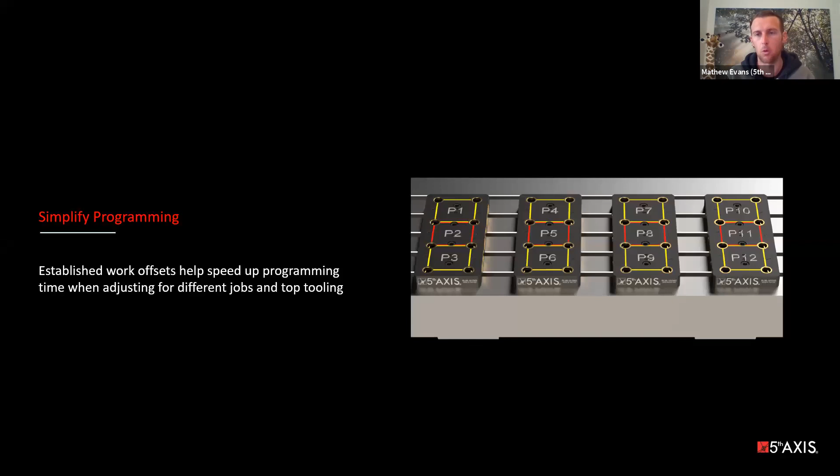So by using the quick change system, we've been able to really simplify and make the programming workflow more efficient. And how we do that is we just establish work offsets. So we take our standard machine table and it basically saves master gauge locations. So in this example, we were going off a Haas, like a VF2, VF3, and we use a master indication pallet to establish our work offsets.

And so once we've got everything aligned and saved into our control, we have set safe position. So if we want to, say, change this small vise to put a Kurt vise on, or put this custom subplate on, our changeover time is seconds to minutes.

Another big thing that we noticed is with some of our newer guys, our second shift, our third shift, we were more comfortable allowing them to set up the machines because it's nearly error proof. We've got set positions on the setup sheet. We say, hey, this vise, this position, next job changeover, we want these vises, with a picture or a screenshot of how many vises, what positions, and we know they're going to locate within a couple tenths, and we've got nothing to worry about.

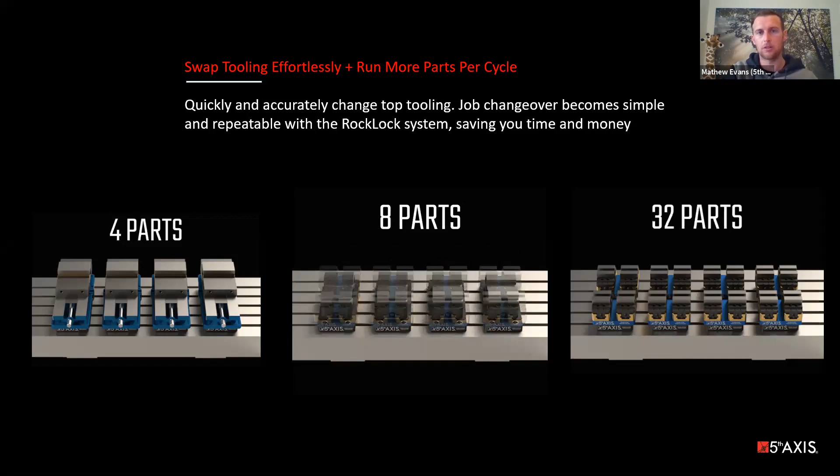So obviously vise rigidity is everything when we talk about, whether you're running 1 part or you're running multiple parts, everything has to be rigid. Your quick change base has to be rigid. The vise obviously has to be super rigid.

But there's a couple things I wanted to talk about that we get asked pretty frequently in terms of this sort of newer style, small footprint work holding, right? We get asked a lot about the holding power and, it looks like you're not holding on to a lot of material. So there's some stuff that we do a little bit different compared to your traditional Kurt vise. So what we've done is, and a lot of our competitors have done similar stuff.

We try and put as big of a lead screw in the vise as possible so that we get the max amount of clamping force out of that particular size. So for their small size, this particular vise on the screen is 5 inches by 6 inches, so 125 millimeters by 150 millimeters. And you get roughly about 5,000 pounds of clamping force, which is a considerable amount of clamping force at mid 40 foot-pounds of torque.

And in this case, we use a set of gripper teeth to bite aluminum and soft steel. So 55 HRC, 4140, other products are in that sort of similar range. We came up with a custom tooth pattern that actually bites into the material. So we'll typically over torque the material, make sure we get good indentation and then back it off and make sure that we get good bite marks.

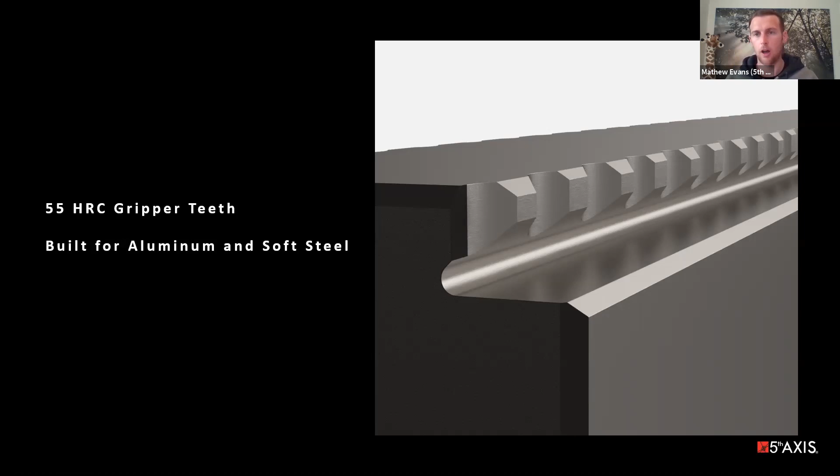But we only hold on to about 100 thou. We tested different depths, 200, 250. 100's a really, really nice number for just, you know, general roughing, but it gives us a lot of holding power in soft material. But a couple things we do.

So there's ways that we have to, because the vises themselves are very small footprint. If you compare that, we make some bigger vises, 10-inch vises, and your traditional Kurt vise that's substantially bigger. The length and the size of the vise body gives you a lot of rigidity. There's no denying that. So when we move to a smaller footprint vise, we're gaining access, now we've got the ability to stack multiple vises.

So there's a lot of advantages there, but there's some stuff we like to do that give us really good holding power and ensure that we don't get a lot of jaw lift. That's typically pretty common with a lot of the smaller vises. And it's not just jaw lift, the whole body of the vise actually flexes. We've done a lot of testing. It's the whole thing that moves because you've gone with a smaller footprint vise.

You just kind of need to use them a little bit differently, kind of treat them more as a precision piece of equipment. But we did some in-house testing, and this is true for really any of the small vise stuff. Reversing the jaws, and we've actually got new versions of the vises coming out that have a 4-bolt pattern that actually give us pull down on the material. So that helps substantially. So you can see the jaw deflection is substantially less when we go to a reversed jaw configuration. So we do that a lot.

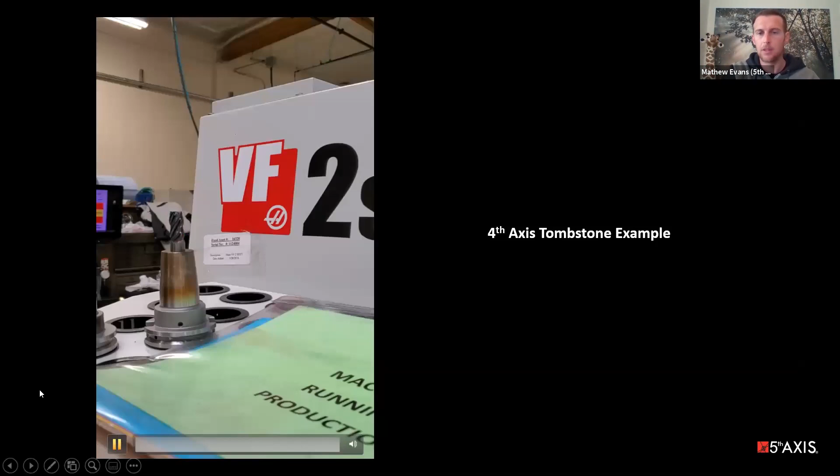So there's little stuff we have to do with these smaller vises to get them to do exactly what we want. But that's common stuff that people look at a lot and ask us about, how do we properly use these things? So here's a little example on one of our 4th axis. And again, you'll see we're trying to be efficient across the board. So where in the past we may have run 1 part on our 4th axis.

Now we're running, you know, 8 parts, 12 parts, so that the 4th axis is going to run continuously for an hour or so, and we can go do some other stuff. So across the board, we're trying to be as efficient as possible. And this is some mild steel that we're gripping on just with the gripper teeth to make this setup

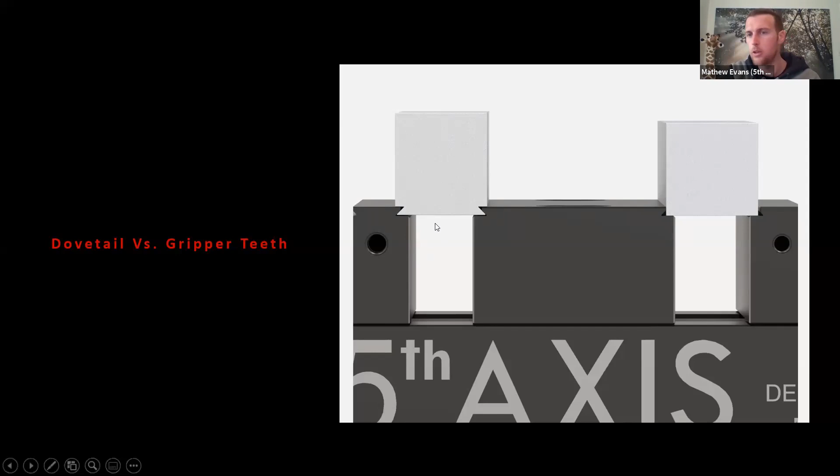super easy. One graphic I did want to show, and a lot of people ask about this. A lot of the smaller jaws offer a couple different clamping configurations. So we offer the standard jaw, which comes with serrations for softer materials. And then there's also a dovetail in there. We're known for a lot of our dovetail products. You can utilize dovetail with any of our products, but you don't have to. So you can clamp them either way, or you can clamp them on the smooth face of the jaw.

So this example shows the 45-degree dovetail, about as rigid as you're going to get, especially if you're doing some super high-speed stuff, harder materials. We always recommend using the dovetail; it's a great way to go. But there were a couple of things I wanted to point out that a lot of people ask us about, which is really proper dovetail. We use a 45-degree, but it's applicable to any dovetail you do: 45, 60, 10 degrees, 15 degrees.

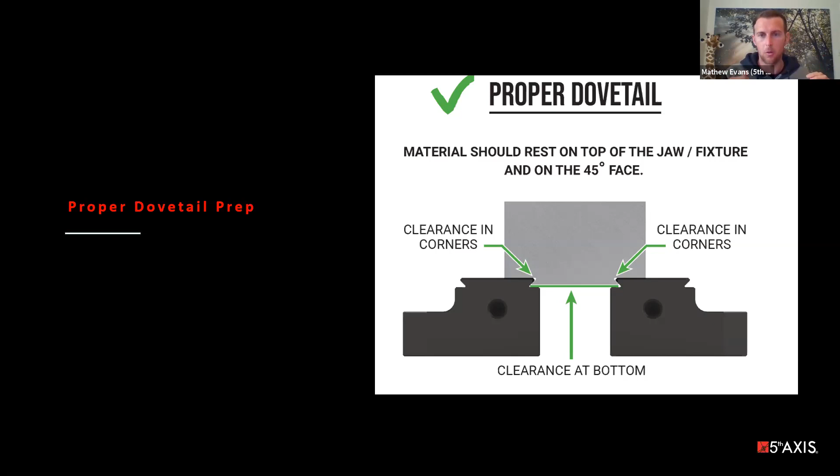The material should sit on the top of the vise jaws, and we want clearance in the corners, and we want clearance at the bottom. And the reason we do that is the dovetail is basically acting as a wedge. So it's really trying to split the material right in the corner, and what that's doing is it's sucking down the material and holding it in place. So we've actually come up with a couple general dovetail prep guides that you can use for any of the systems, and I can share those links with you guys.

The dovetail process is very simple, but preparation of any of the dovetails has to be done correctly, or you can have a slew of unintended issues, from chatter to the material bouncing. But if you know how to properly do that, it's an extremely rigid, extremely solid setup. And if you guys follow us online, we hold material that's 3, 4, 5 times the size of our vise, which you would never be able to do without utilizing a small dovetail.

Harder material, titanium, heat treated stuff that's typically a nightmare to hold, we can use a dovetail. We're using that mechanical advantage to hold that material in place. And then we can go with high speed spindles, and we can use all the exotic cutting tool coatings and really see some major gains. And obviously, better access to the material.

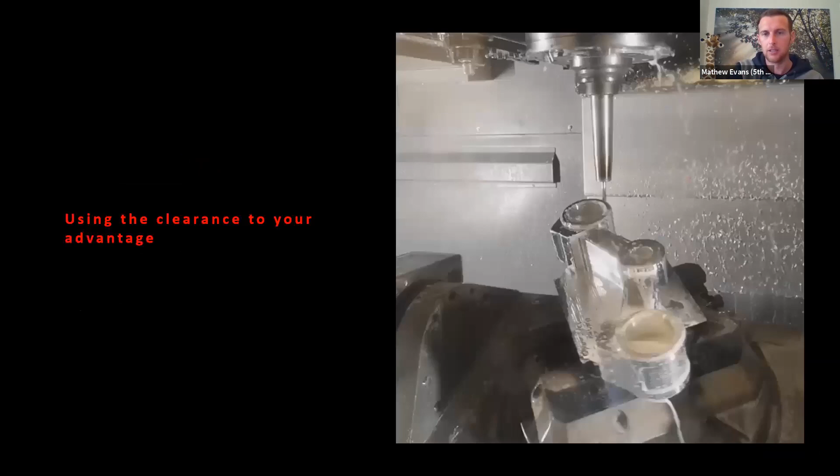So we can do stuff like this; this is buddy Phil up in Canada. He does components 3, 4 times the size of the vise that you just wouldn't be able to do without a dovetail. So there's some really neat advantages to it, as long as the prep's done properly and you kind of prove everything out in your Fusion, your CAM, there's some really, really great advantages to it.

And so the last thing I wanted to talk about, which is something that Rob and the guys at Autodesk and I have all been working on: all of our full models are always available. So full 2D drawings, 3D models. We've actually got a new configurator that's coming online in about a week or so. That's going to be more machine specific, and it's going to be really cool. But we're working on a workflow to import directly into Fusion. So keep an eye out on that.

We're just trying to do everything we can to make this process super efficient, so that it's easy to go from, okay, I need these couple vises, bring them into Fusion, start programming. You have your vises out there on the floor. You tell those guys, grab these 2, and just make the whole workflow as easy and simple as possible. Because we all have a lot of stuff going on, and if we can simplify some of this stuff, we're able to compete with anybody in the world. No matter what the country, we can be efficient.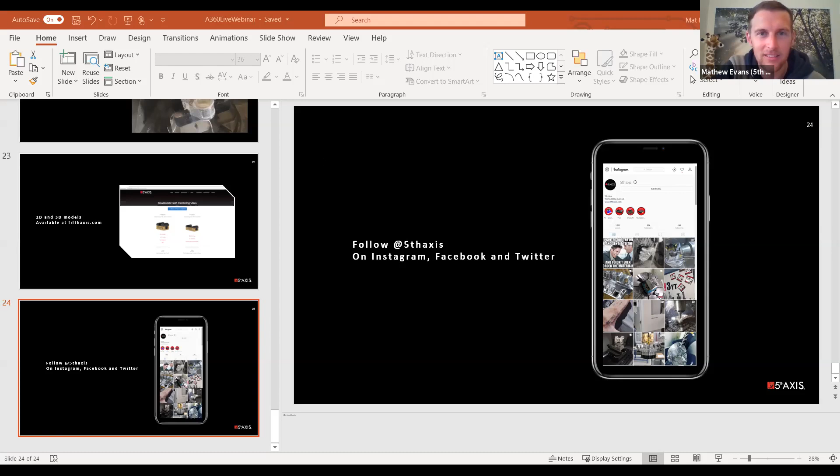Cool, all right, I think I gotta stop sharing. Hey, thanks Matt, it was incredible PowerPoint. Absolutely, let me stop sharing. Should be good.

Does everybody see that? All right, so let's get some energy going here, right? I know it's been a long day. There's been some good presentations. Matt did a great job. Tony, you started everything off, it was incredible. I'm going to touch on a little bit of what Tony started.

I just want to let everybody know, I'm used to doing these presentations, I've done them all over the country. I'm used to walking around, I'm a little bit animated, I like to get involved. So today I'm sitting at my desk, so no pants - just letting everybody know, no pants today. I'm going to do this freestyle, all right? And give me a little bit more energy.

Before you go on, I don't know if everyone else is seeing it, but there's a big black bar over the presentation. I think it's where you've got the Zoom windows up, if you just minimize that. How's that, better? Yeah, that's better. Perfect, thank you Jack, appreciate it.

So I'll just introduce myself. First of all, my name's Don Grandt. I'm the National Application Engineer for Harvey Performance Company, based out of Rowley, Massachusetts. I've been with the company for 4 years, with a background of 32 years in the cutting tool industry - I started way back in 1987. I'm not sure if they let the wisest one go last or the oldest one go last, so I'm going to say they let the wisest one go last. We're proud to be part of this group, proud to do a presentation and hopefully educate some people a little bit more on micro machining.

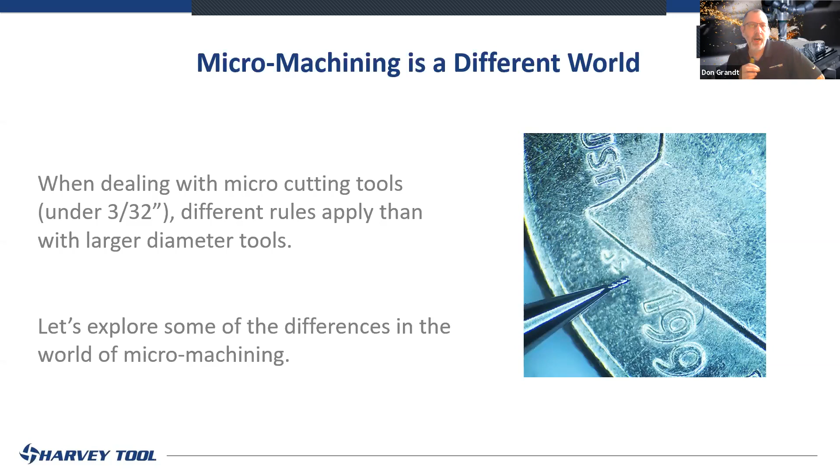So let's talk about micromachining. Micromachining, as Tony mentioned, is a different world, and with Harvey Tool we have a lot of experience in micromachining. When you're dealing with micro cutting tools - and this is where it gets a little different in different areas - I like to think of micro cutting tools as 3/32 and below. Some people go 1/8 and below, you can go 1/4 inch and below, and micro cutting tools can be 0.062 and below. They all run differently as they get smaller. There's different rules we need to apply with smaller diameter tools versus larger diameter tools.

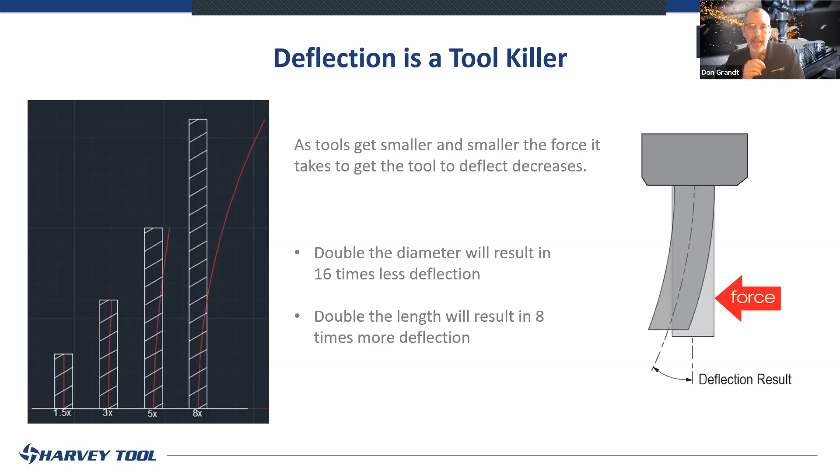Think about this: if you double the diameter of the tool, it will result in 16 times less deflection. That's just doubling the diameter. If you double the length, it will result in 8 times more deflection. So if we go from 15 thou to 30 thou on the length of cut, we'll get 8 times more deflection. If we take the diameter and double it, we'll get 16 times less deflection. That's a very interesting fact to think about when you can possibly go with a larger diameter tool - it really helps with deflection against the tool.

So in that case, core strength is key, right? When we're talking about miniature and smaller tools, core strength really has a lot to do with it. So versus using a 3-flute tool, you might want to look at tools with more flutes for micro cutting. Harvey Performance actually goes down to 0.2 millimeter with 4 flutes, so you can run under 8 thou diameter with 4 flutes. As many flutes as you can put in there is going to reduce deflection by increasing the core strength. If we can get the right core strength, go with a larger number of flutes - which isn't something you'd normally think of with micro tools. When you think of smaller diameter tools, 15 thou, 20 thou, you're thinking you'll have fewer flutes. But it is possible to find tools with more flutes that have a stronger core, and that will make your tool deflect a lot less.

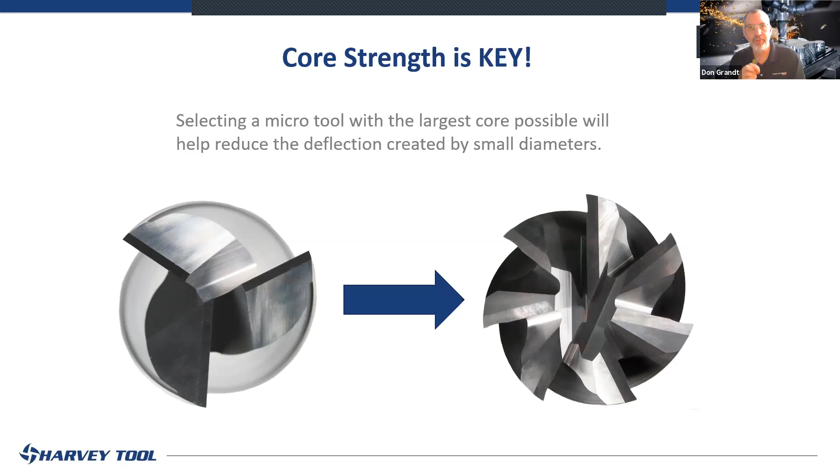Okay, let's talk about some tooling tips. Number one - the biggest thing to look at with micro tools, before you even put that tool in the spindle, is making sure your handling of that tool is correct. I can't tell you how many shops I've gone into where they break the tool just putting it in the holder - an 8 thou end mill, a 10 thou end mill, a 15 thou end mill. As that tool gets smaller, it's even more important to take care of it. You spend a lot of money on these tools, so we want to make sure we're not damaging them before we put them into the collet or the holder. It's important that they stay in the packaging until they go into the holder - keep the plastic on the end of the tool before it goes into the tool holder, and this will help prevent some of that damage before you even get started.

Watch out for tool wear. Tool wear is critical, especially when you're running these tools. We need to keep them sharp. It's very important to get the cutting tool sharp. It doesn't matter if it's a half inch, a one inch diameter tool, or a micro tool, it's important for the tools to be sharp. Sharp is key. So we wanted to monitor what our chip loads are, and our surface footage, whereas we'll get into a little bit more on high-speed machining. We want to make sure we keep that cutting edge sharp.

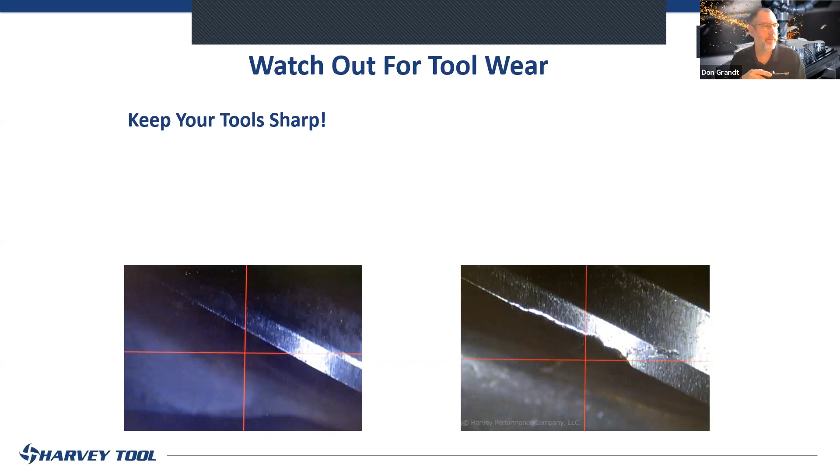I've done a lot of applications with a lot of cutting tools at the customer, and anybody that runs micro tools, there's an easy way to tell whether or not the tool is being successful, right? I call it IDB, the acronym. That means after you run your application, run your part, the main way to find out if you were successful is IDB, which means it didn't break. That's pretty much how we look at it. In most cases, when you're running a 10 thou end mill in a new application, we're looking to make sure it didn't break. So what we're trying to do is really optimize those geometries on those tools, give you the best performance. So when you put that tool in, you can hit the green cycle start button and have the confidence that that micro tool is going to perform. It's not going to break.

You have the right conditions in your holder, your spindle, your workpiece, your right gripping. Matt did a real good explanation on your work holding. Tony did a great explanation on your high speed speeder heads and your RPM, and then Jack talked about your program. All of these things are very important when you're talking about micro tools. So I think this whole presentation really adds up to making sure that you can put your micro tools in your spindle and not worry about the performance you're going to get out of them. So as I said, picking the right geometry, okay?

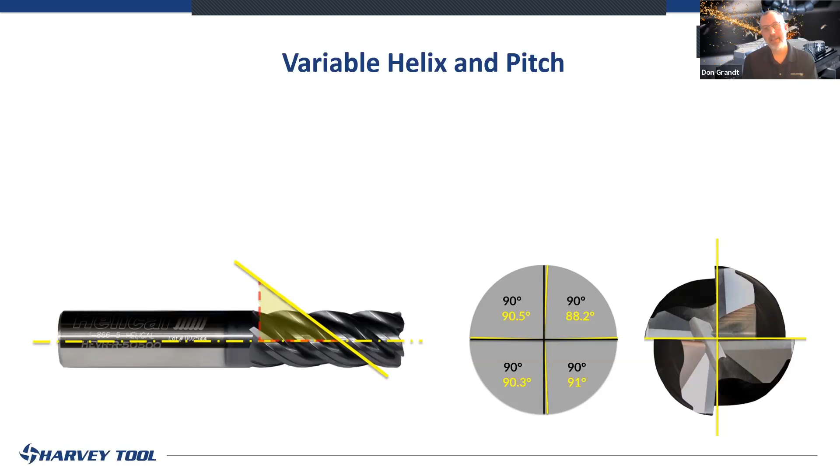What this does as you get those elevated speeds is break up those harmonics. If you don't have variable helix, another nice trick is to try and get an end mill with an odd number of flutes—look at your 3s, look at your 5s. Those will break it up a little bit if that tool isn't variable helix or variable pitch. But if you can find something that's variable pitch or variable helix, you'll definitely see a better finish, better performance, and you'll obviously cut a lot freer with that tool. They help dampen the reverberations that otherwise lead to chatter. So it's very important to make sure you're using a variable helix for optimal performance.

Tool coatings—let's talk about tool coatings. Are they worth it on micro tools? I'm here to tell you absolutely, absolutely tool coatings are worth it on micro tools.

Now there are some caveats to that. When you're getting down to 2 thou in diameter, 4 thou, 5 thou in diameter, you're not going to be putting tool coatings on some of the really small micro tools because the coating will actually round the cutting edge more than natural carbide sharp grinding wheels would—it'll put a round corner on the cutting edge. So as you get smaller, you want it as sharp as possible. So you have two things you're fighting with the tool coating: you're fighting the roundness, so it's not going to cut as free.

But the caveat to that is, if we're cutting free, the tool coating is going to add 30 to 200% of tool life. So the optimal way to actually get a tool with the proper coating is to consult your experts, your cutting tool manufacturers, because what we'll do is optimize with our coating departments the thickness of those coatings for micro tools—making sure we're not running a 4 or 5 micron thick coating, but a smaller coating to get the sharpest cutting edge possible.

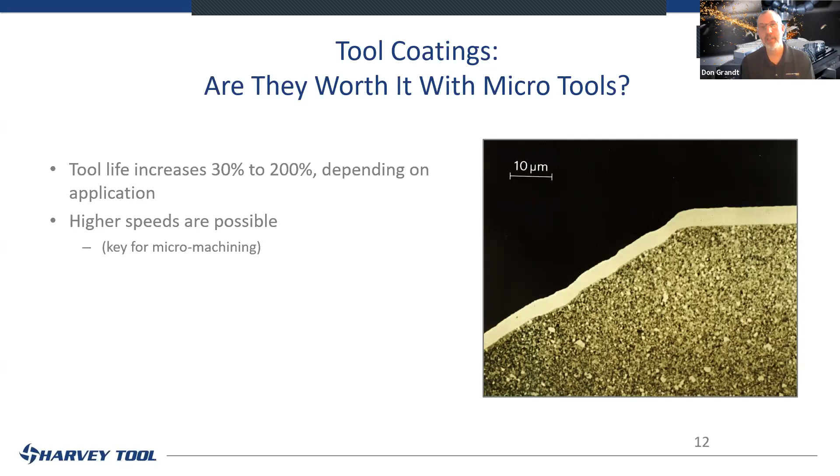Whereas you're running 200 surface foot, on a 15 thou mil you're obviously going to be running a lot higher RPM, in which case we're generating a lot more heat with that micro tool. Therefore the coating is well worth it, as long as we don't round the cutting edge too much so we start deflecting and pushing away from the material we're cutting.

It also adds surface lubricity, making it cut a lot freer, and removes corrosiveness and irregularities on the tool. We're smoothing out that tool by putting the coating on there to let the coolant slide off better and let the chip slide off the tool better. So by adding a coating to your micro tools, it's very beneficial.

Now, if we're going to talk about coatings and micro tools and what's beneficial, we could get into 3 hours discussing whether what type of coating for what micro tool should we be using. Anytime you're talking end mills, anytime you're talking cutting tools, it really is a combination of the end mill, the drill, with the material that you're cutting.

Every material has different characteristics. So it depends. If you were to ask me, should I use a coating on this end mill for my application, the first question I'm going to ask you is: what material are you cutting? What are you trying to do? What are your reaches? What are your lengths? Let's get you the right tool with the right coating, with the right geometry, so that you put that micro tool in there and you're going to be able to hit the cycle start button and walk away.

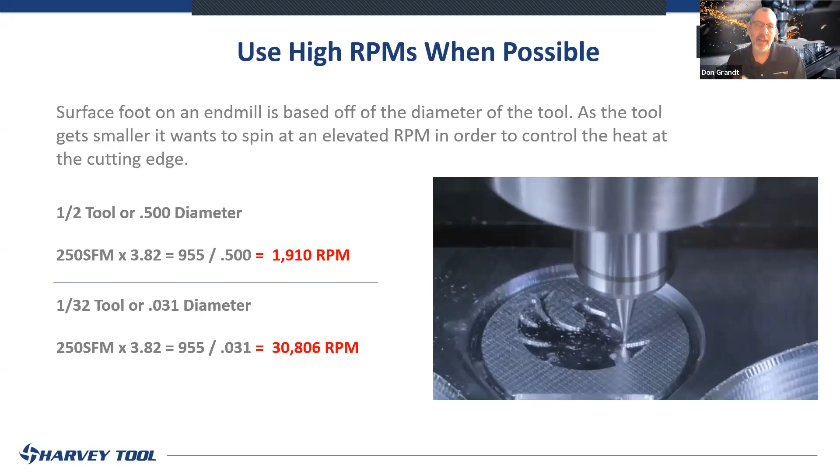But tool path is very important with that, because there are accel and decel rates on machines that can take a 2 millionths chip load. If you're not careful, and you're running at elevated feeds, you can turn a 2 millionths chip load in a corner into 2 thou, and it will not be very good for your tool. So that's why I love this whole way we put this together, where you take the high-speed spindle, you couple it with Fusion adaptive clearing, with the right tool paths, with the right end mills — get the combination of all three of those working together, take all the variables out of the machine tools, out of your spindle, out of your end mill, and you know what? Have one person running 3 machines instead of babysitting one all day. It's the right combination, but there are a lot of factors that have to go right in order to be successful with micro tools.

I think we're doing about 5 minutes here. Does that sound about right?

So let's talk tool runout here real quick. Tool runout is very, very important, as Tony mentioned, with micro tools, as your tool gets smaller. Now, Harvey Tool actually makes a tool from 1 thou in diameter up to 120 thou in diameter, in 1 thou increments. So we actually sell a 1 thou diameter end mill, uncoated. See, that's what I'm telling you.

If we were to coat that thing, you'd probably have a hard time cutting with it. It's actually 2 flutes. It's 1 thou diameter. I always tell everybody it's plus or minus a thou on the diameter, guys. So if nothing shows up in the box, you got what you ordered. It's well within spec, so you're good to go. I'm just letting you know.

So it's very important to make sure when you're running those micro tools, 10 thou in diameter, 8 thou in diameter, 20 thou in diameter, you really want to make sure that you have the right holder, you have the right spindle, and your TIR or runout on that tool is very minimal. You will lower your tool life. You will decrease the part finish. You're not only losing the tool life and chancing breaking that tool, you're going to lower the finish that's actually on the outside of your part.

Your tool life decreases 10% for every 1 tenth TIR. The usual suspects are the spindle, making sure you have the right spindle. I think Tony was saying some of the runout on his spindles were around 2 micron, which is incredible. With the right collets, the right tool holder, make sure the machine was not crashed. That's always good. Less than 5 crashes a month is always preferred.

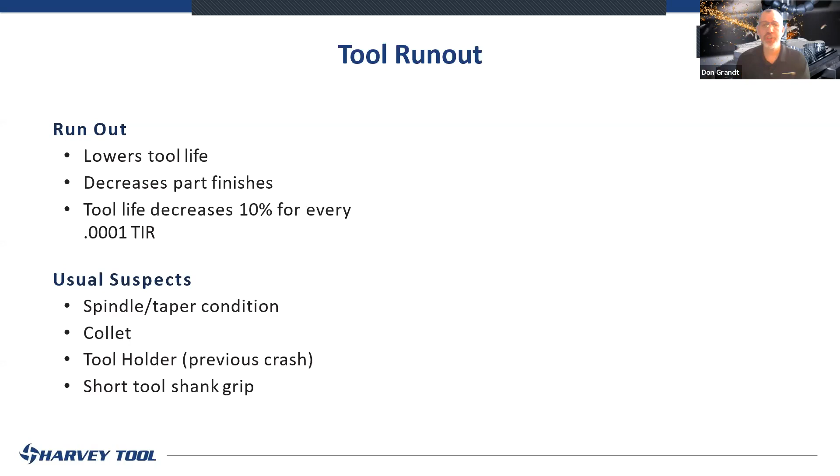Make sure you get the right reach with the right shank, okay? A lot of people are trying to get past holders, fixtures. Another plug out to Matt here over at 5th Axis, getting the right fixture, the work holding, making sure that you got the right amount of shank up into the holder so you're getting max rigidity, okay? Very important, right holders. So make sure you're looking for that right tool that has the right length, reduced neck to give you minimal runout coming out of your spindle.

We talked about part finish. Okay, tool runout is equal to poor surface finish. As your runout gets larger, Tony touched on it earlier, you will not cut on every flute evenly. If you're running out 1/10, okay, and you're taking a 2 millionths or maybe a 5 millionths chip load, depending if you're running a 10 thou tool, your teeth are going to cut inconsistently. It's going to cause bad tool performance.

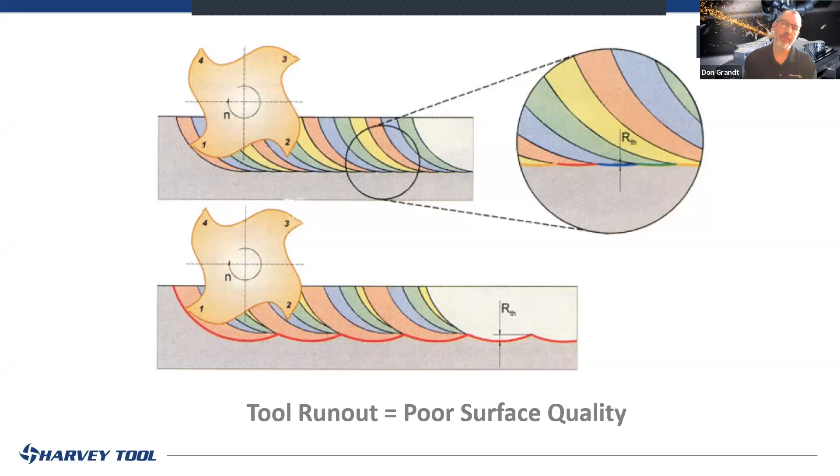This is what I tell everybody to make sure you're getting minimum TIR: really check your boxes. Make sure you have the right holder. Make sure you have a brand new collet. Make sure it's cleaned. Make sure everything's running out. All micro tools come on an oversized shank. You can check the runout on the shank to make sure your collet is running out correctly, and then I would say assume, guarantee with Harvey Tool that we ground it correctly and the TIR is within tenths, if not millionths.

So I like this slide here, and this is very important to a lot of people that are actually slotting. Are we slotting with a micro tool, or are we making a slot? I'm here to tell you, you're making a slot with a micro tool, you're not slotting. Anybody that runs standard end mills in any kind of slotting situation knows that traditional slotting is all about chip evacuation and flute count, okay? So what you're trying to do in traditional slotting with a 1/2 inch end mill is use the fewest flutes possible to get the chips out. That's what we're trying to do.

When you come to micro slotting, it's all about rigidity, deflection, and core strength. Trust me when I tell you guys this. I have been at the spindle over and over. Medical companies put as many flutes as possible in full slotting with a micro tool. Do not worry about chip evacuation.

And let me explain this real quick, okay? When you're running a 10 thou end mill in a full slotting application, you are not running anymore, usually. Now you can tell me different, usually 2 or 3 thou axial depth of cut running at maybe an accelerated speed and feed. When you run a 2 to 3 thou axial depth of cut, chip evacuation is not your problem. Your problem is when you get down to the bottom of that, you're putting force on the tool. That's what's wearing it out.

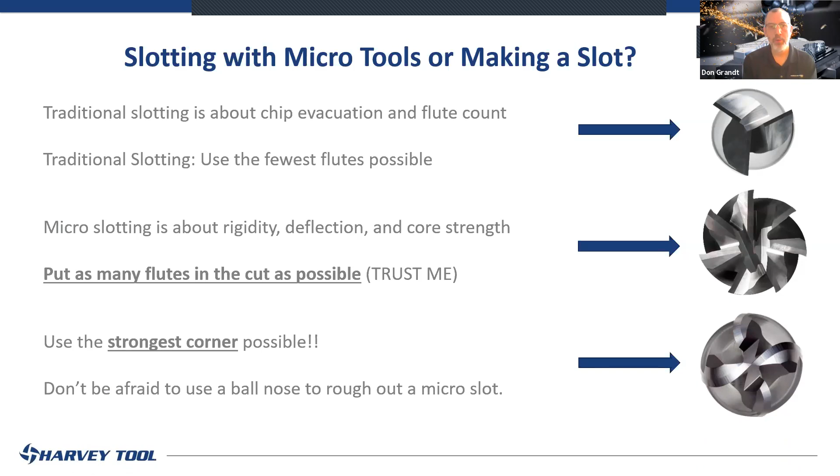Another thing you might want to do is if you're doing a slot, you can add the strongest corner as possible. In some cases, even a ball nose. You can slot with a ball nose all the way down to the bottom and clean up your corners with a square corner. Slotting with a ball nose is not unacceptable and can yield you better tool life than if you're having a big issue with other square corner or corner radius tools. So don't leave out slotting with a ball nose tool.

And when you're running a micro tool, how many shots do you get on this? I mean, we would all love to buy one 10 thou end mill and say that's going to get me through the whole job. That's the ideal. That's the goal. We know that's not reality in most cases, but that's the goal, and that's what we want to do is actually just get one end mill, get through our part, and then move on from there.

So see the forest through the trees, guys and gals. I'm sure we have some both joining us, which is great. But see the forest through the trees. Know your application material, work holding, machine conditions, tool holder condition, tool choices. Know your surroundings, causes, effects, everything that's going to affect that tool to deflect, the reaches, the lengths, how it should be cutting, chip loads, speeds and feed, the situation at hand.

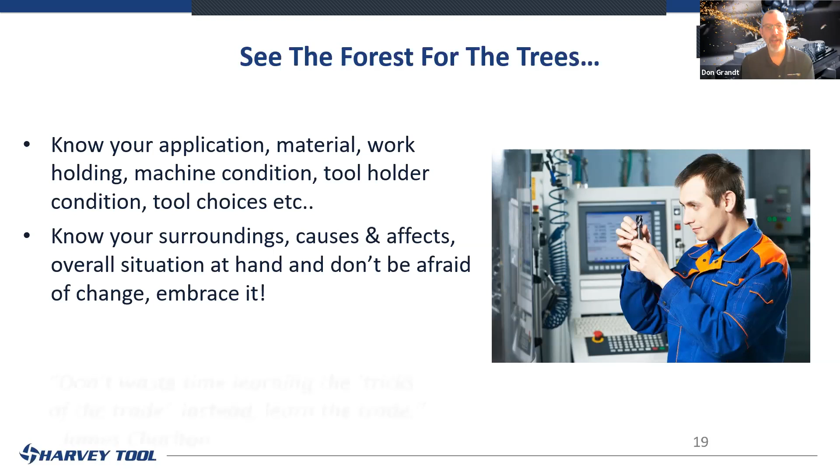And don't be afraid of change. Embrace it. Something might work for you. Try different things. Consult your cutting tool manufacturer, consult your work holding, consult your tool path professionals, spindles, consult those guys. So I love this saying: don't waste time learning the tricks of the trade. Instead, learn the trade. James Charlton, very good saying.